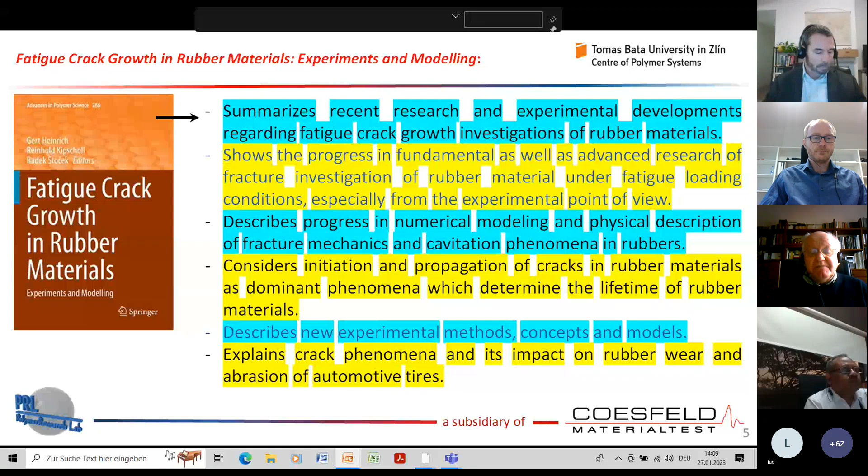It describes new experimental methods, concepts, and models—concepts meaning also how to correctly evaluate the data. In some chapters you also find explanations about crack phenomena and their impact on rubber wear and abrasion, especially of automotive tires. This is also an issue that now has great importance for many branches of industry, in the rubber industry and tire industries.

This is the content, and the green marked headlines are related to the presentations today.

As I already mentioned, Stocek will give a presentation about some revisions of fatigue crack-growth characteristics, and also some special issues concerning the determination of the parametrical functions which define the deformations within plane strain tensile rubber samples. So this is focused on discussing inaccuracies in fatigue crack-growth characteristics, and also on consequences for the development of durable rubber compounds.

Chris Robertson as the next speaker, or as here in that case it is the first speaker, he will report about his chapter that is dealing with the fatigue threshold of rubbers and its characterization using the cutting method.

In this chapter you will learn more about the definition of fatigue threshold and endurance limits, these very specific but important keywords in connection with the fatigue physics and fatigue engineering of these materials. Last but not least, you also find a very nice review about the molecular interpretation of all these parameters.

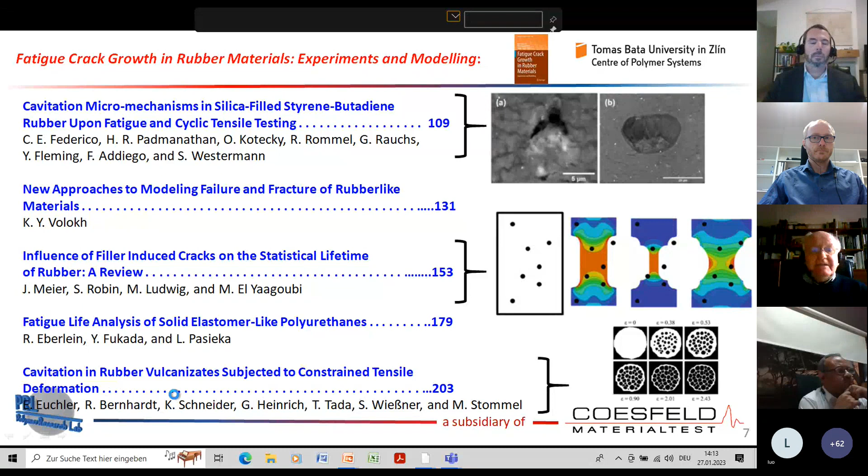Then a chapter from Dresden, cavitation in rubber vulcanizates subjected to constrained tensile deformation. Maybe this is also content of the next webinar. We will report more in detail about that.

And then we have the presentation of Dr. Ghosh from Hasetri about fatigue crack growth and the relationship and impact on phenomena like chip and cut wear. Here, especially chip and cut wear of natural rubber systems and natural rubber SBR blend systems.

This is, of course, very interesting for people that use these kinds of rubbers in connection with the production of tires. Last but not least, only to mention, it's not the topic today, but I would like to mention that here in my introduction are the other chapters that are still in this book.

That is a review on the role of phase morphology and the energy dissipation around the crack tip during the propagation of cracks in a rubber system. That is from Hannover with Dr. Klüppel and Mr. Wunder.

And then also thermoplastic elastomers. It's not only an issue of rubbers, of classical rubbers, it's also an issue for people dealing with thermoplastic elastomers. This is the contribution from Professor Major from Linz, Austria. He presents a methodology used for the characterization, the fracture and fatigue behavior of TPEs.

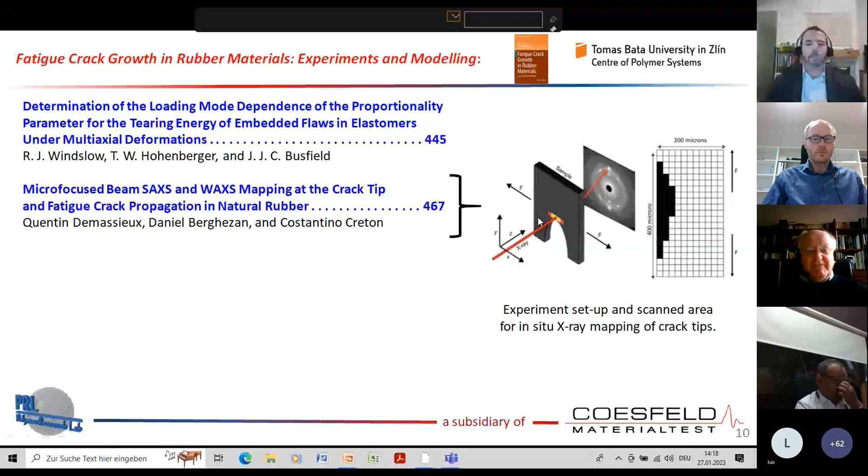So this is the content that I have briefly explained. I think we can now start with the first presentation.

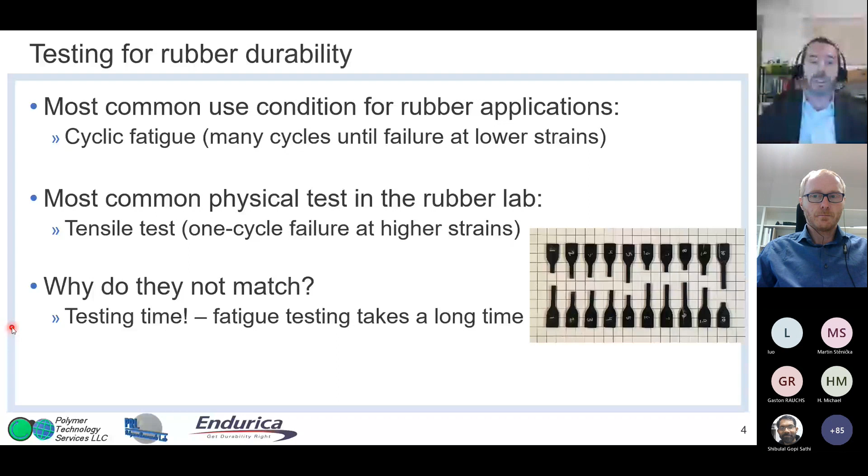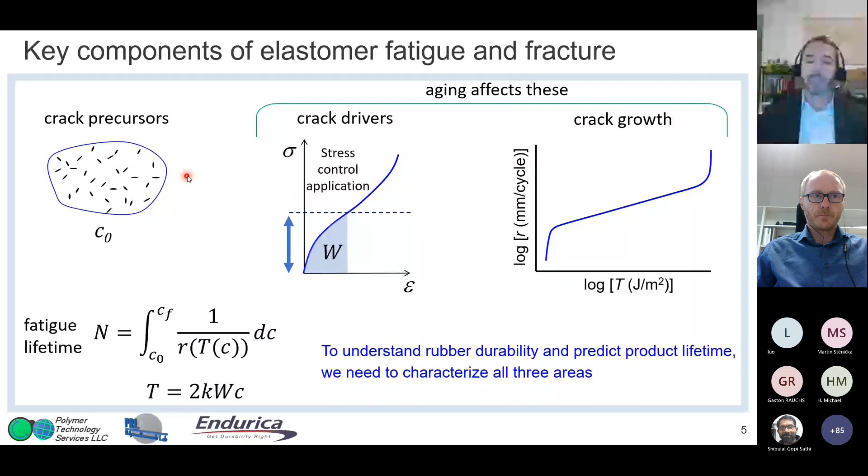So it is a physical property of elastomers, and it is affected by rubber formulation, as you'll see later, especially the type of elastomer. If you can figure out a way to make a rubber part operate below this limit, then it can have a very long fatigue lifetime, again not considering other life-limiting changes to the material.

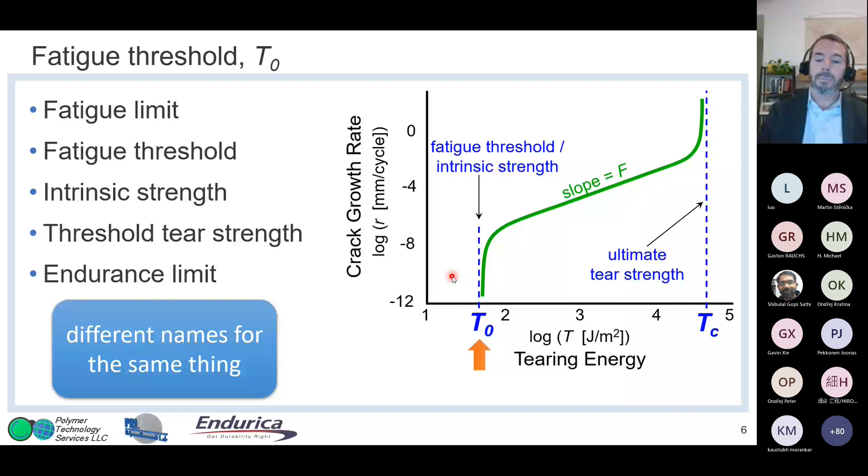And then you would watch the crack grow with a high resolution camera, and so you measure a crack growth rate, how fast that crack grows for a certain number of fatigue cycles where the crack is open and closed, and then characterize that crack growth rate at different conditions.

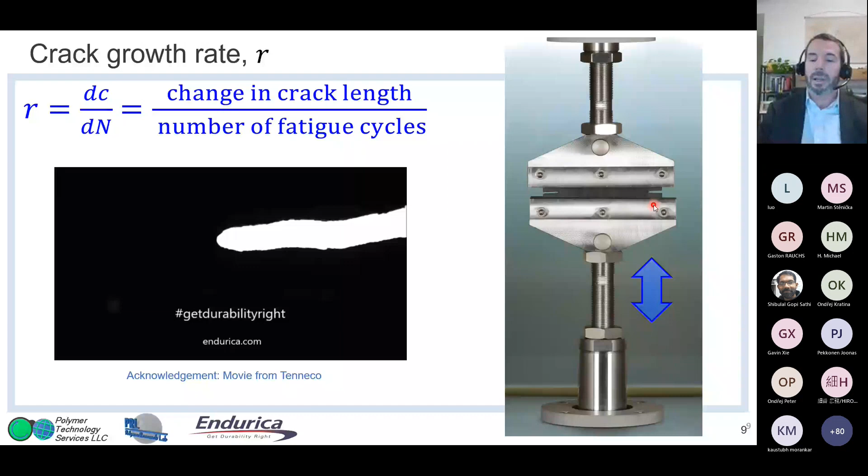And actually, Dr. Stocek, who you'll hear from later, pioneered the use of two cracks on one specimen, which allows you to get twice as much information during a measurement. And this can even be fully automated. This is a Coesfeld tear and fatigue analyzer.

This particular version is testing 9 specimens simultaneously. There's 3 groups of 3, 3 here, 3, and 3 more behind the camera, which is moving. And then each specimen has 2 cracks in it. So you can see the potential exists for really collecting a lot of information about fatigue crack growth in an automated way.

So you take that information and you would vary how much the crack is opened, small amount, larger amount, even larger amount, and that can then be converted to a tearing energy, allowing you to plot the crack growth rate versus tearing energy like I showed earlier. It typically shows this power law response with an exponent F. So this is the fatigue crack growth testing that's typically done.

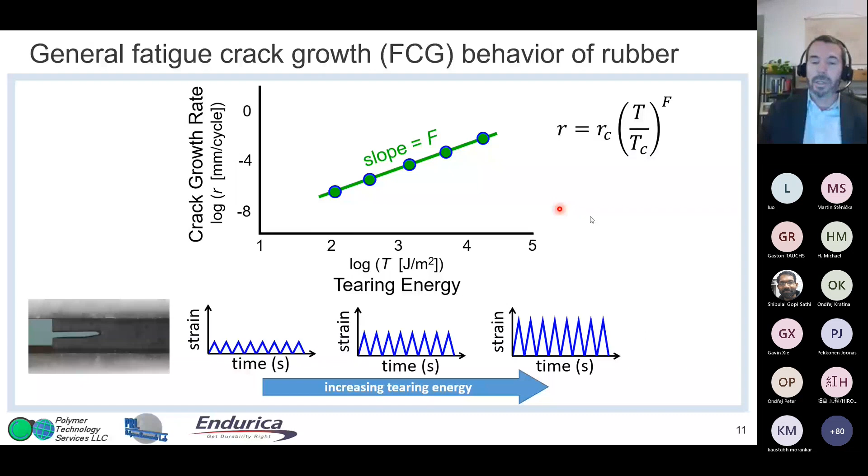In particular, butadiene rubber is better than natural rubber for small scale abrasion, wear resistance of tires. Natural rubber, on the other hand, is much better for very high severity cut and chip type damage of rubbers. But again, characterizing the crack growth curve allows us to do such a comparison of materials. So what I just talked about is this middle part of the crack growth curve here.

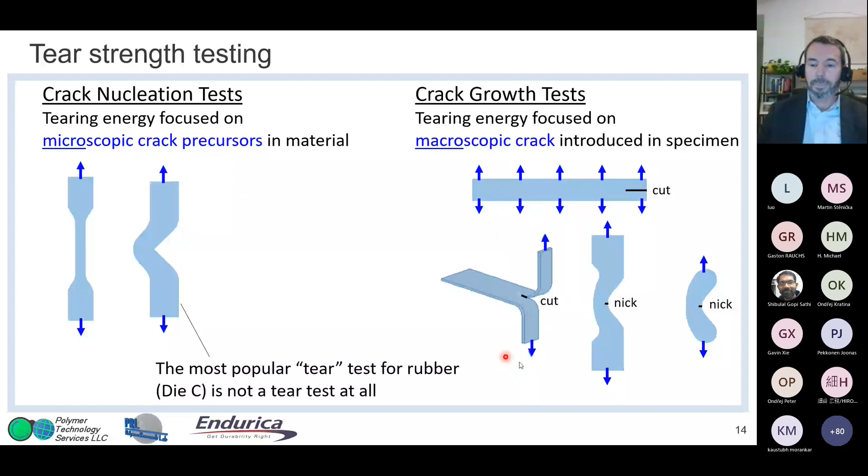On the other end of the curve is this fatigue threshold that we're going to spend some time on. So we talked about the ultimate tear strength, that's kind of an upper limit. This now is the lower limit of the crack growth curve, below which fatigue cracking will not happen.

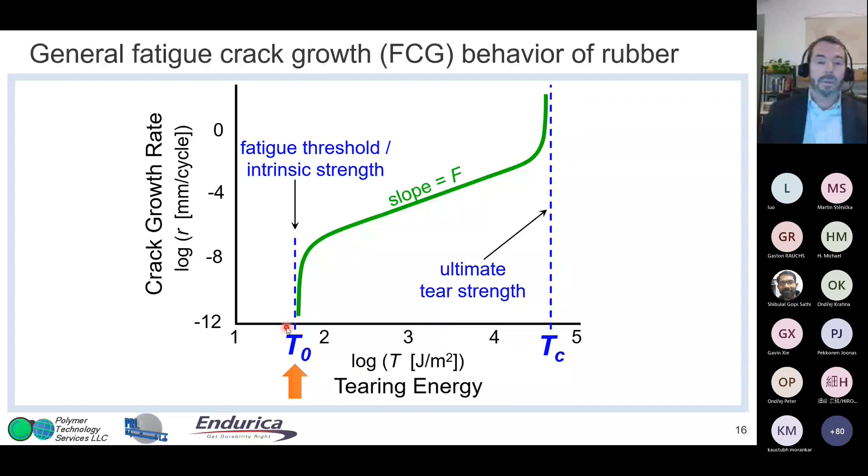So I'm going to give some examples of how to measure it. Before I do, though, the intrinsic strength that is underlying this threshold...

...is the minimum energy to grow a crack in rubber, which is connected to the energy to break the polymer chains. So if these are two cross links, and this is the portion of polymer chain that's between those two cross links, as the crack grows through the rubber, it has to break all of these sections between cross links in the plane of the crack. So if you want to know how much energy it takes, then you can add up all those chains and find out the energy to break the bonds.

And that's exactly what Lake and Thomas did, to relate it back to some molecular things that we can use to compare different elastomers, for example. But we'll get to that in more detail later.

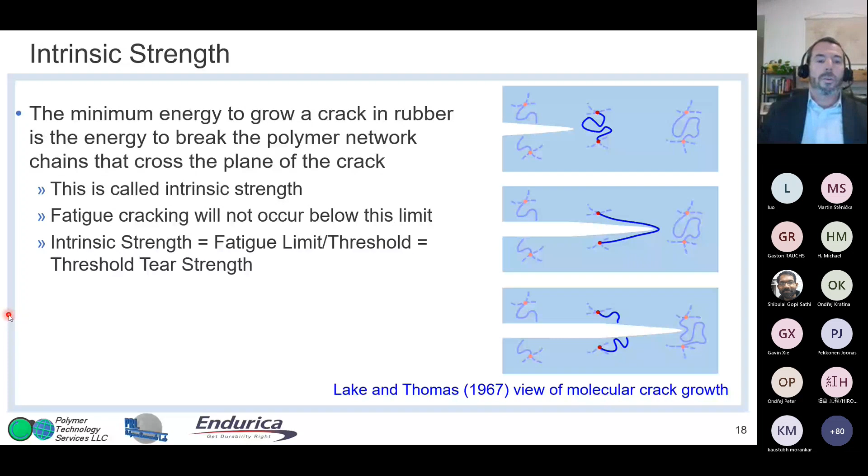Why is that so difficult to measure, the breaking of polymer chains? Well, when you load up the rubber from the far field, not all that energy actually makes it to the crack tip. A lot of that energy gets dissipated in front of the crack and never makes it to breaking the polymer chains. And so that's why the tear strength of rubber can be 10 to 10,000 times higher than this fatigue threshold for breaking all the polymer chains. The tear strength in magnitude is 10 to 10,000 times bigger than the amount of energy it takes to break the polymer chains, and that's because of dissipation.

Hysteresis and energy dissipation, some people view it as something negative in rubber compounds because of heat buildup and tire rolling resistance, for example. But if it wasn't for viscoelastic energy dissipation, rubber would be a very weak material. So hysteresis is our friend when it comes to resisting damage development inside rubber.

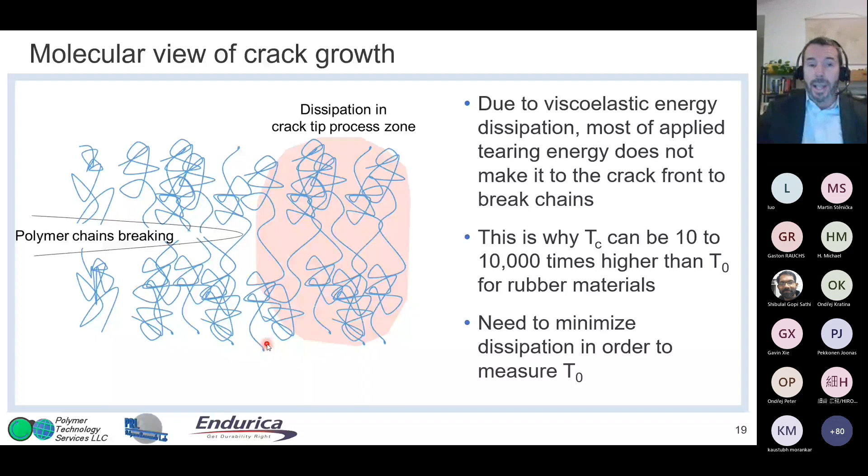Now, the problem is if you want to measure T0, you somehow have to figure out how to minimize this dissipation in front of the crack tip so you get closer to only measuring the breaking of the polymer chains. So there are three different ways of doing that. One is to measure crack growth using fatigue crack growth like I showed you, but very slow, very low tearing energy near that threshold.

The second way that I'll show is to use tear strength of swollen samples or at high temperatures. Why do we do that? Well, swelling and high temperature are both a way to reduce hysteresis, dissipation. So some way to take this big crack tip dissipation zone and shrink it down so that I'm mainly measuring the breaking of polymer chains.

And then the cutting method, which does that minimization and focuses the strain energy density at the crack tip using a blade.

So I'll go through all three of these.

The first one is trying to get somewhere close to this downturn in the fatigue crack growth curve so that you can determine T0. The problem is when you do these crack growth measurements, where this turns down is somewhere around 10 to the minus eighth millimeters per cycle. And so what does that mean? Well, if you wanted to measure half a millimeter, even at 10 hertz, it would take 2 months. So you can start to see the problem with trying to use this method to define where this curve starts to turn downward. And obviously 10 to the minus 10th is even higher.

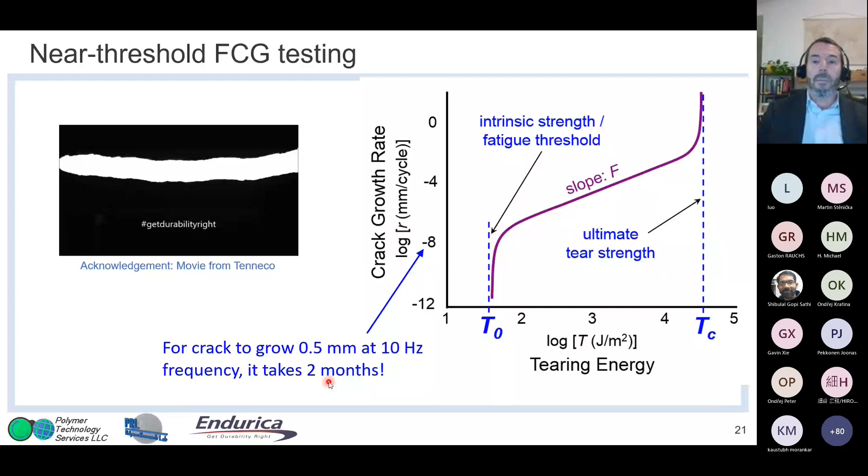But you can see, crack growth testing, you can get most of the information for the curve in a few days. But if you want to get anywhere close to the fatigue threshold in order to quantify it, then it starts taking really extremely high lab times.

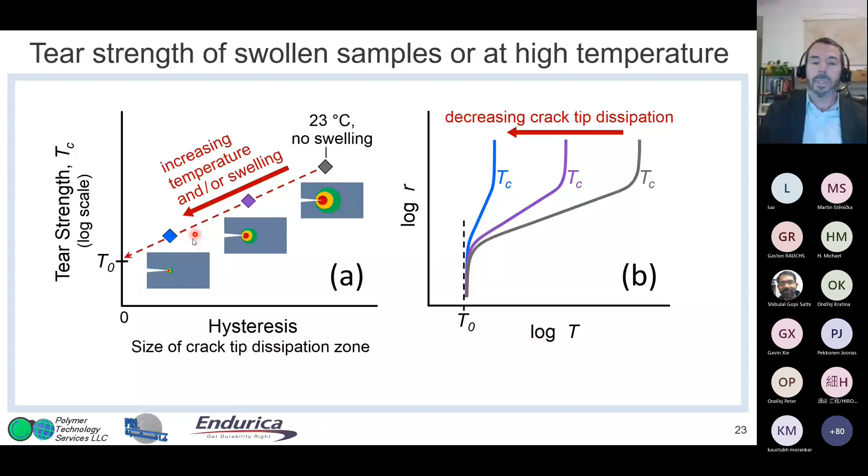If you're using solvents and doing swelling measurements, the solvent can evaporate during testing. And then if you do swelling, you have to correct the T0 because of the swelling. Remember, the crack has to break all the polymer chains, so if you put solvent in the system, you're basically diluting the polymer chain. So you have to account for that. The swollen value ends up being smaller than the dry value, so you have to use the swelling ratio to relate between the two. And that just assumes the only effect of solvent is pumping up the volume and diluting the system. It could certainly have other effects on the tearing of those polymer chains that really isn't accounted for in this kind of analysis.

And then finally, the method I'd like to focus on more today is this Lake and Yeoh cutting method, using now a commercial instrument, the intrinsic strength analyzer from Coesfeld. This is a commercial instrument, readily available. It was developed through a partnership between Coesfeld and Endurica, where I spent 4 years.

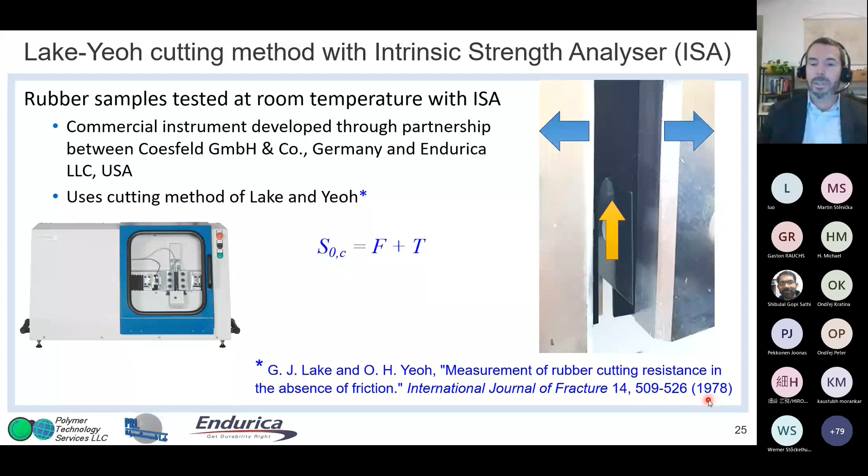Basically, if you look at this, this is a planar tension specimen, but it's turned sideways. It's turned vertical, and there's a cut in the specimen into which there's a blade that's pushed. You can see it much better here. So here's a blade. So we still open the crack like you would normally for a tear strength measurement or a fatigue crack growth measurement.

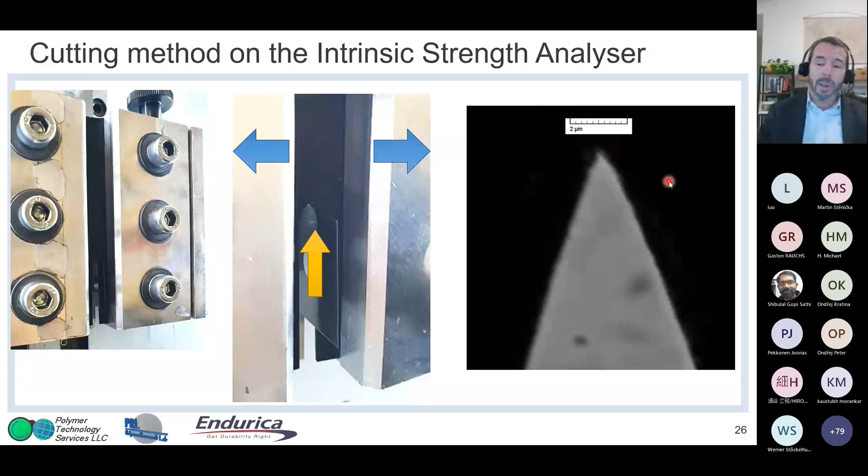Open the crack at some given tearing energy. And then while the crack's open, push a very sharp blade - you can see this is 2-micron, a very sharp blade - push it into the crack while it's open. And it's not a single measurement. You have to make measurements at several different points.

The whole goal of the blade is to localize the strain energy density. If you just open the crack from the far field, as I mentioned earlier, a lot of that strain energy density doesn't make it to the crack tip because of dissipation. But when you push a blade into the tip, it localizes the strain energy density to minimize dissipation.

So as I mentioned, it's a series of measurements. You open up the crack at different levels, and then you very slowly push the blade in. We also make measurements at other faster rates first, and then slow down to this final very slow cutting rate, for which the data is shown here.

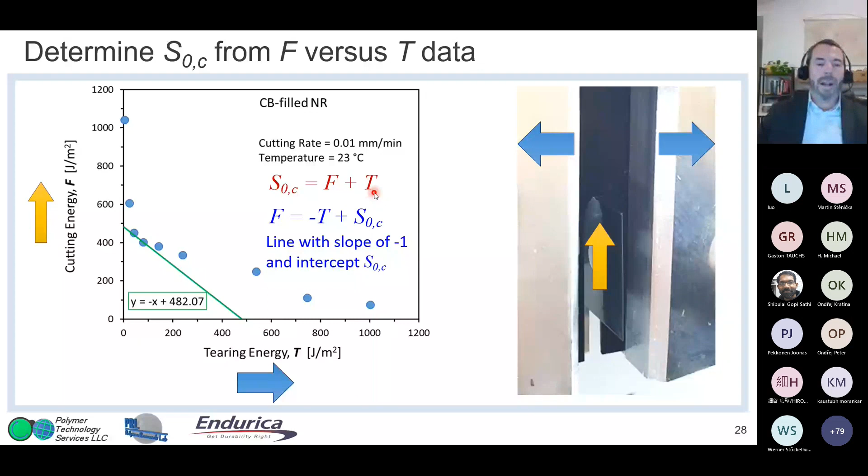Remember, this is at the other end of the crack growth curve. And you can now already see that there's going to be a flip of behavior. Now, butadiene rubber is showing much better crack growth resistance.

So you can see that we don't have T0 yet, we have this so-called S0. What Lake and Yeoh did is they plotted the quick cutting method value that I just showed you and compared it to T0, measured from that near threshold, very long fatigue testing I showed you an example of from Dr. Stocek earlier. What they saw was that these were related to each other, and the difference was this constant, which was related to the blade, how sharp the blade is, etc. So one of the key things needed in this method is a control material for which you know T0, and then you can measure S0 using the same conditions in your other experiments.

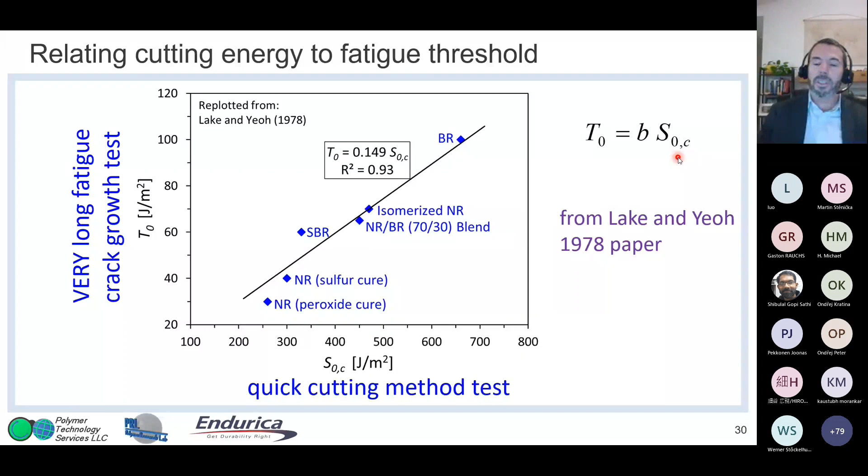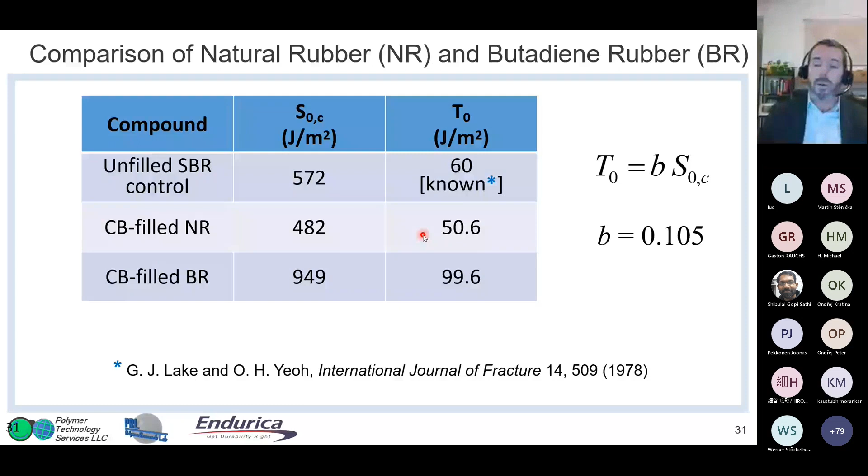So that was done here. I showed you the data for carbon black filled natural rubber and butadiene rubber, 482 and 949. Our control material was an unfilled SBR, it had a value of 572 and a known T0 of 60. Based on that known value of 60, we can determine B, which can then be applied to the other two materials. What you see is that the fatigue threshold for butadiene rubber is about double the fatigue threshold for natural rubber, but both are much smaller than the tear strengths for those materials.

So you can see that here. Here are the tear strengths, 50 and 99.6 — sorry, the intrinsic strengths, the fatigue thresholds, are 50.6 and 99.6. And then the tear strengths I showed you earlier are much higher, 18,500 and 3,000. And what we learned was, if you assume some very fast crack growth rate for TC and some very slow crack growth rate for T0 — 10 to the minus 2 for TC and 10 to the minus 8 for T0 — you could actually plot those data points.

So here's natural rubber, 18,000. Here's butadiene rubber, 3,000. You can plot those two data points on here, and then do the same at the low end. What you see is butadiene rubber is here and natural rubber is here. If you just draw a straight line between them, it almost captures the actual fatigue crack growth data that were acquired from testing. This was a sign that if you know the two ends — the tear strength at the upper limit and the fatigue threshold at the lower limit — that knowledge can give you an approximation for what's happening in between, and you can even reproduce the crossover simply by drawing a line between those two points.

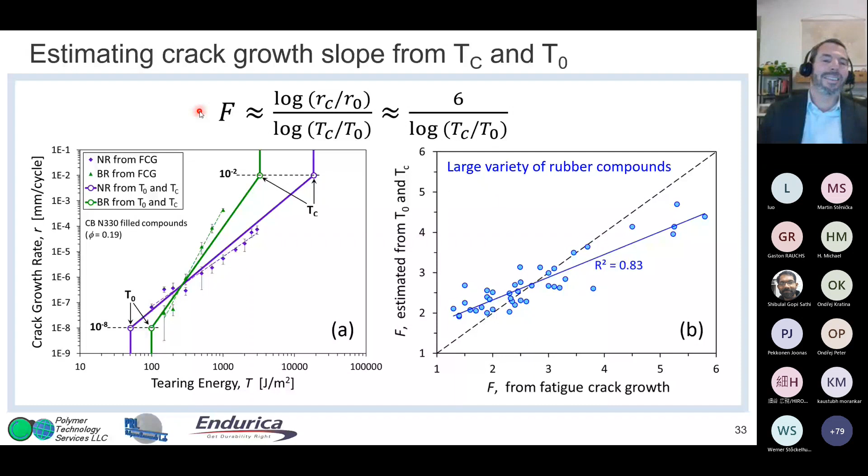So that brings us into this Lake-Thomas molecular theory and some rubber formulation effects — they kind of dovetail nicely together. Lake and Thomas, again, took this picture that in order for a crack to move through rubber, the minimum energy required is the energy required to break all the polymer chains. So this chain is already broken, and the first thing that happens is the crack stretches the chain between the crosslinks. One of the assumptions in their approach is that these crosslink points don't move — maybe that's not realistic, but again, that's one of their assumptions. So first thing is the chain has to become stretched.

That's where this molecular weight between crosslinks comes into play. You have to energize all the bonds in the polymer chain, stretch them till one can break, and then the polymer chain breaks. And what you see is there's some really nice things here that a polymer chemist and a rubber scientist can use to figure out what's happening in a rubber compound.

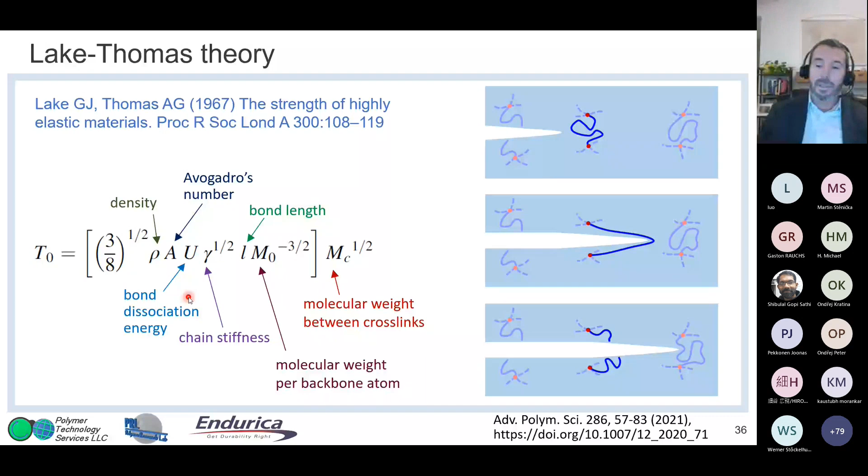And what you can see is that if you hold everything constant and you change only the elastomer type, the main area where things are going to change is this M0, molecular weight per backbone atom. Smaller is better, notice the minus sign here. And chain stiffness has a positive impact on fatigue threshold.

So we made some measurements on carbon black filled elastomers, different elastomer type: natural rubber, isoprene rubber. Obviously, chemically, these first two are very similar to each other, butadiene rubber and an emulsion type SBR. And the M sub 0 is the molecular weight per backbone atom. It turns out to be 17 for polyisoprene, whether natural or synthetic. Butadiene rubber is much smaller at 13.5, and then SBR is 19.6 because of that heavy styrene group.

What you see is if you compare natural rubber and butadiene rubber, the M sub 0 exactly explains what's going on. You get a much smaller M sub 0 for butadiene rubber, and you get a much higher fatigue threshold, 80 instead of 20. SBR is not just an M sub 0 effect because SBR also has higher chain stiffness. So that one needs chain stiffness to come into the discussion to understand where it fits. But the relative ranking is lowest is natural rubber, highest is butadiene rubber, and in between is SBR.

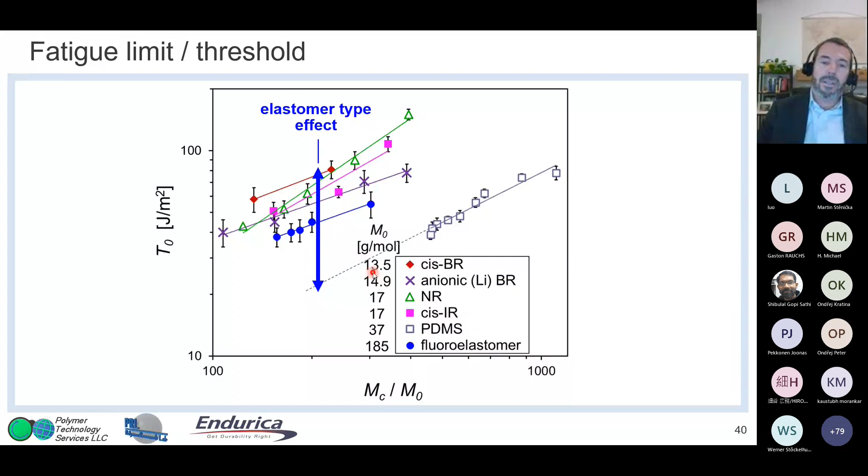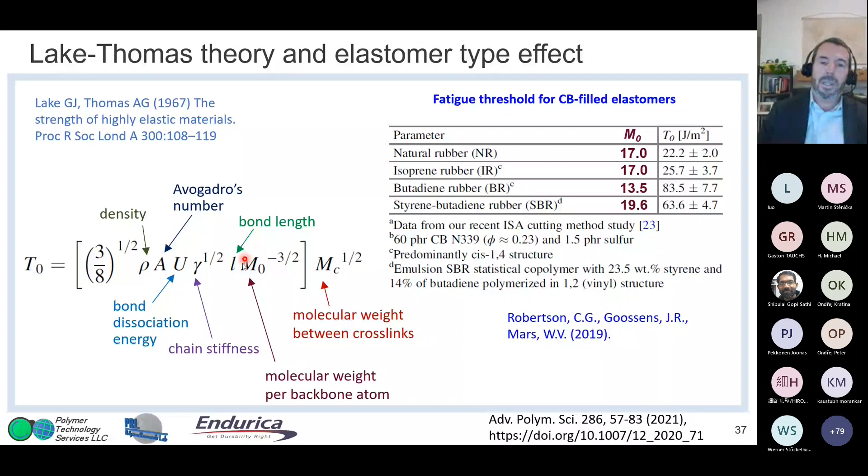This dependence on M0 means smaller is better. So that means a lighter backbone means a skinnier polymer chain. And so it basically means more polymer chains have to be broken per area, and therefore that leads to a higher fatigue threshold. So you see something like polydimethylsiloxane and fluoroelastomers have really high M0s, and they have very low fatigue thresholds. So the elastomer type effect can be very nicely rationalized based on this molecular theory.

When we dug into cross-link density effects to see if this prediction held, we generally did not agree with it. But we didn't do a lot of testing—just a couple of systems: carbon black filled SBR, and a passenger tire tread blend of SBR and BR rubber with silica and silane. When we plotted fatigue threshold from the cutting method versus sulfur loading in the formulation, adjusting accelerator to keep crosslink type similar, we didn't see the expected downward sloping trend. So there's still work to be done in this area.

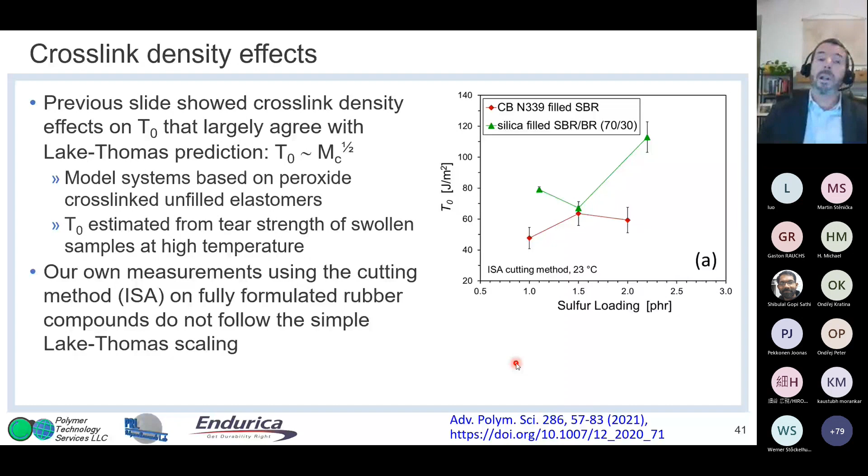Oil is relatively simple to rationalize because it's related to that swelling effect. If you add oil to the rubber formulation, it pumps up the volume and dilutes the polymer chain. Based on the swelling discussion earlier, you can determine a swelling ratio from the amount of oil added and its density relative to the polymer. It's typical to buy oil extended elastomers like SBR with 37.5 parts of oil. I was curious what this analysis would show, and it turns out oil extension reduces the fatigue threshold by almost 20%. So if you want a durable, long-lasting rubber compound, removing oils and other low molecular weight additives is generally a good strategy.

Filler effects: before we had access to the cutting method, the only literature available was from swollen tear strength testing—an approximation method where swelling the sample removes some hysteresis, getting closer to the actual fatigue threshold. Previous work published by Bhowmick and co-authors showed a striking effect of filler volume fraction—carbon black and even clay—on fatigue threshold in both natural rubber and SBR compounds. But again, this was an approximation method with the limitations I mentioned.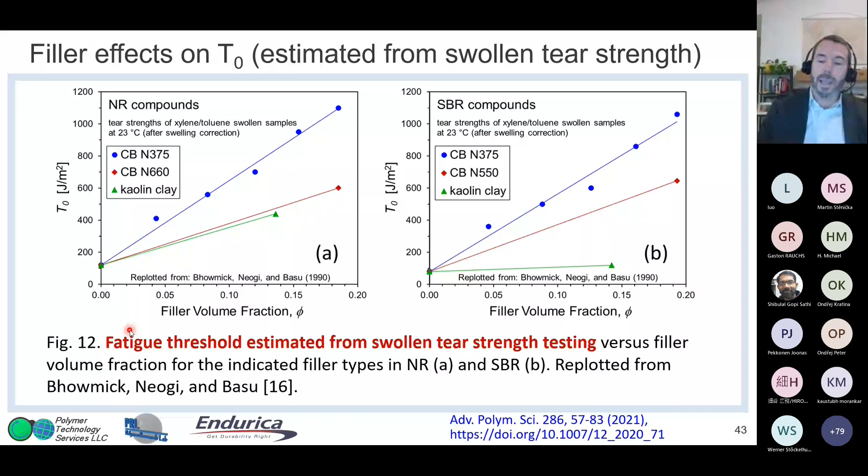We did this ourselves with EPDM at three carbon black loadings of N550, SBR at three loadings of N339, and the tread silica formulation I discussed. If anything, we saw the opposite effect, or at best basically flat. So we did not find a significant effect of filler volume fraction on fatigue threshold, at least in our rather limited measurements so far.

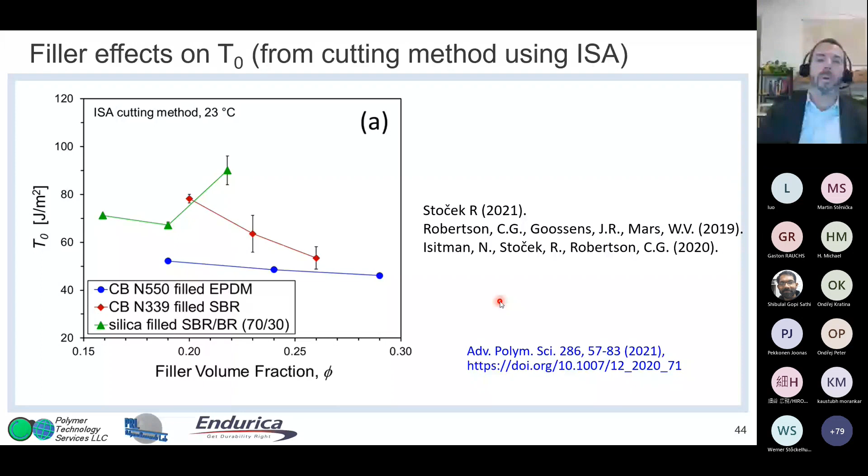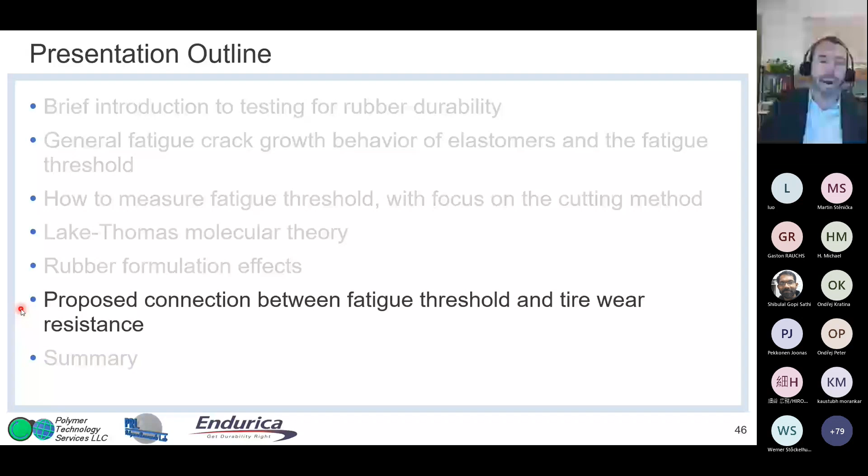The last thing I promised to get to, with just a couple minutes left, is this proposed connection between fatigue threshold and tire wear—not cut and chip wear resistance, but small scale, low severity abrasion. There are micro asperities on the road that give a range of tearing energies to the tire tread, depending on asperity size and the normal load and slip conditions on each one. So it's a heterogeneous situation with respect to spatial considerations and load intensity. Fatigue in rubber starts with crack precursors, which grow and eventually intersect, leading to tire wear. This is just the mechanics piece of tire wear—it doesn't include other pieces like thermal oxidative breakdown and other contributions. But at least some of wear we can understand from this micromechanics.

Remember that the fatigue threshold for butadiene rubber is about double the fatigue threshold for natural rubber. One of the mysteries I've always scratched my head at is why natural rubber should have worse wear resistance than butadiene rubber. I think this picture can help understand that.

If you have a distribution of tearing energies happening from that very heterogeneous situation at the surface, where road asperities are sliding past the surface of the tire, anything below the fatigue threshold—here for natural rubber and here for butadiene rubber—will not contribute to damage. So if you have a higher fatigue threshold, some of those events happening at the surface won't cause crack growth. Based on this, the higher fatigue threshold for butadiene rubber may be one reason why it has better wear resistance than natural rubber.

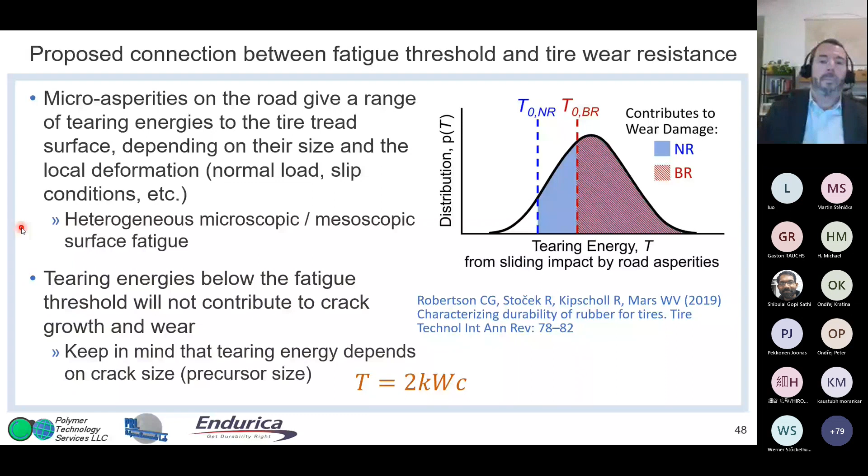But what about the TG effect? There's this tire industry heuristic: lower TG is better for wear resistance. Based on dissipation in front of the crack tip, this never made sense to me from a crack growth perspective. If anything, higher TG should be better.

But we have to remember there are very few polymers actually used in tire treads—essentially only BR, SBR, and natural rubber. So my perspective is it's not lower TG that's better for wear resistance, but rather more BR in the formulation, because of this ranking of fatigue threshold: BR is higher than SBR, which is higher than natural rubber. And BR is about twice the fatigue threshold of natural rubber.

I showed you the Lake-Yeoh cutting method that's now commercially implemented on the intrinsic strength analyzer. It can characterize a fatigue threshold in about 1 to 2 hours. Compare that to near-threshold fatigue crack growth, which takes months—now we have a really quick method to assess this key parameter of rubber.

If you take that parameter and combine it with tear strength, you can get a first-pass approximation of the power law slope for fatigue cracking. Lake-Thomas gave us a nice molecular view of fatigue crack growth at the fatigue threshold limit, and it generally predicts elastomer type effects. However, cross-linking effects and filler effects need to be studied further, with no real consensus yet. All of the literature prior to the intrinsic strength analyzer was mainly estimated from tear strength of swollen samples, and that may be one reason why we have some disagreement among the data results.

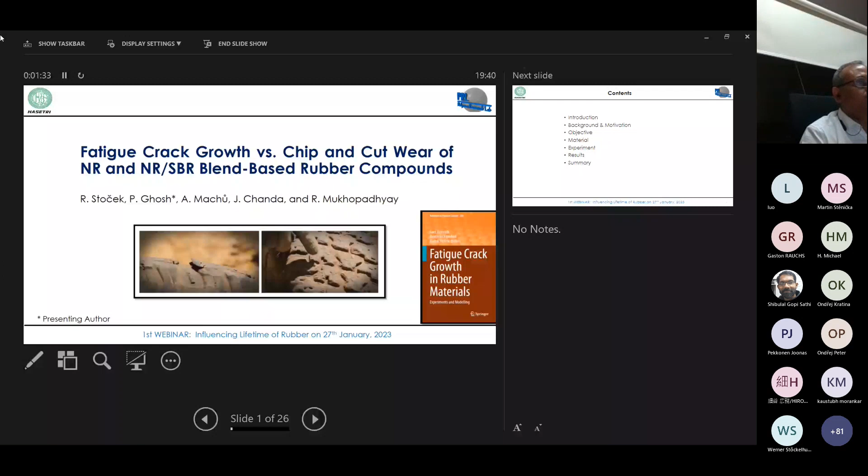So the presentation—can you switch? Sorry, can you switch to presentation mode? Can you see the next slide now? Is it visible, the content slide? Yes, we see that, but I suggest switching into presentation mode so the slides are larger on the screen. Okay, it's showing here, I'm not sure. If it doesn't work, it's okay. Okay, yeah, we see now the actual slide as well as this next one. Okay, okay, I'll just do one thing.

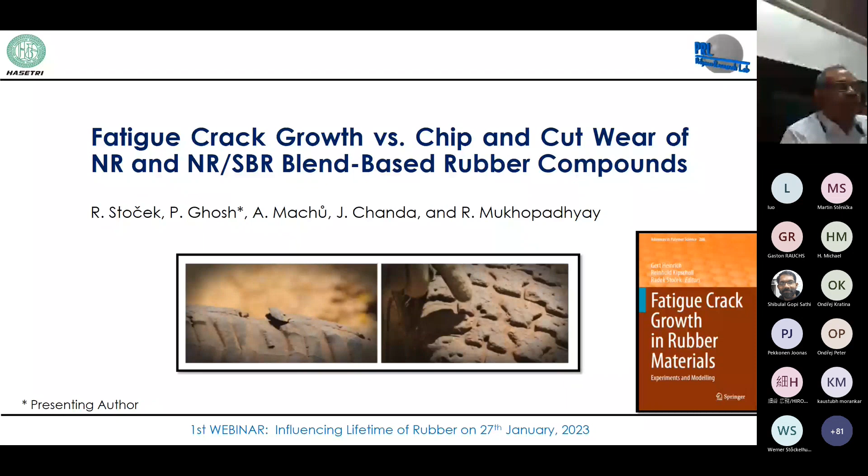So the presentation flow will be like this. I will start with introduction about the tyre and its performance requirements, and then we'll talk about the background and motivation. Then we'll discuss the objective, followed by material and experimental methodologies used, and we'll discuss the results, and finally we'll summarize. So if you see a tyre as a vehicle component, it could be anything.

It could be a two-wheeler, a four-wheeler, or a commercial vehicle. So there are 4 or 5 different functionalities which it has to perform. First of all, it should carry the load. Then it should assist you in handling, like acceleration or braking. It should provide ride comfort, specifically with respect to noise, vibration, and harshness. And it has a good contribution with respect to fuel efficiency or fuel economy because of the rolling resistance.

And the last two parts are related to safety and durability, which are interrelated. Safety with respect to the braking distance on wet roads, or durability - like if a tire hits a pothole or some nail, the tire should not fail, or it should show some resistance so that the passenger will not be in trouble. Today's presentation topics are also related to safety or durability with respect to fatigue crack growth or cut and chip.

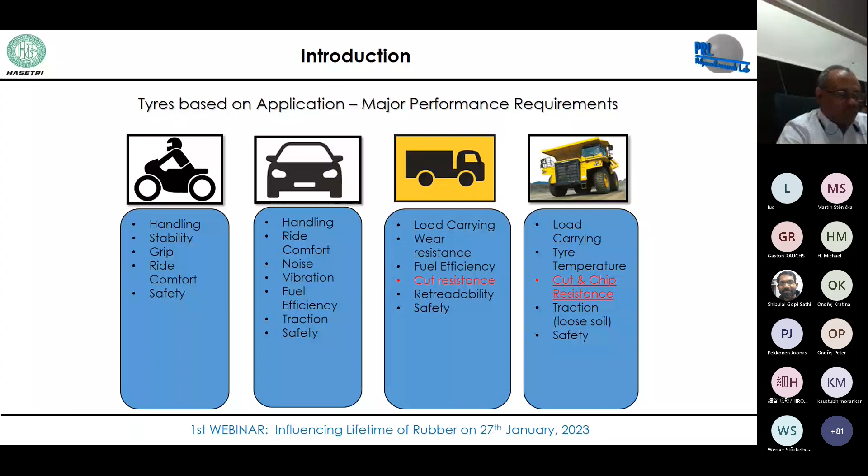Before I go to that, I would like to give some historical perspective of tire failure, and I will not take much of your time, just to explain the history. However, all of you, maybe those in this generation of tire technologists or the previous generation, know the Ford Firestone fiasco, and it has a relation with fatigue crack growth. So just to link with that, I'm trying to give a few facts.

Two personal friends, Harvey Firestone and Henry Ford, started their corporate relationship in 1906. Henry Ford chose to outfit Firestone tires to his new Model T, which was one of the most famous cars in those days. In 1990, the Ford Explorer began to lead one of the greatest automotive revolutions in history.

Globally, it remains a popular model today. However, the journey of the Explorer's epic popularity was not so smooth - it has a troubled history. What was that? I will try to explain in a very brief manner.

Another important fact: between 1990 and 2000, the NHTSA received a large number of complaints regarding tire failures on Ford Explorers equipped with Firestone ATX, ATX2, and Wilderness AT model tires. This resulted in many road accidents, and some people died. As a result, Firestone and Ford Motor Company had to recall and replace about 23 million tires, which cut the market value of Bridgestone and Firestone in half. This is the fact about the Ford-Firestone issue, which was reported in early 2000.

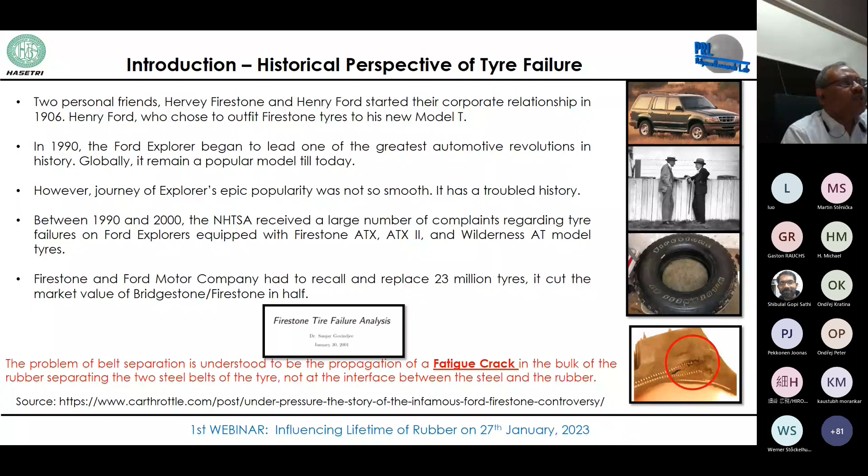This cut-chip generally appears in the later stage of the tire's life. Let's say if one tire is running about 1 lakh kilometers, it may be happening at the end of its life, maybe more than 60% or 70% of its life. These are a few of the pictures.

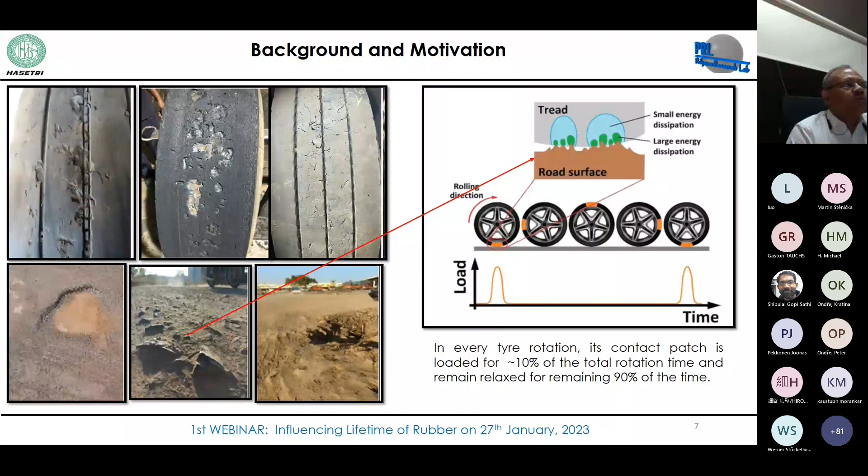So what is the objective of this particular work? To develop a laboratory test method that can simulate the realistic live operating condition, that can predict our performance with respect to crack tip behavior, which is very important. At the same time, also the quantitative determination of the complete Paris-Erdogan curve characterizing the FCG behavior, from endurance limit up to ultimate strength.

Dr. Robertson had already given a complete detailed account of the threshold, what is the threshold or endurance limit or intrinsic strength. He made my task much easier since the audience has already got detailed information about it. But for the sake of keeping connectivity with my work, I will try to explain things in a simpler way, a very quick introduction, so that it will not be a repetition of what Dr. Robertson has just spoken a few minutes before.

So it starts with the endurance limit T0, which is also called the intrinsic strength, then the stable crack growth zone, the steady state zone, and ultimate strength or critical tearing energy. One important point, which Dr. Robertson has also mentioned, is that the endurance limit or intrinsic strength was not talked about much in the literature. In 1978 Lake and Yeoh, and later Professor Bhowmick, gave some of these things, but due to the unavailability of proper instrumentation, it was not explored so far.

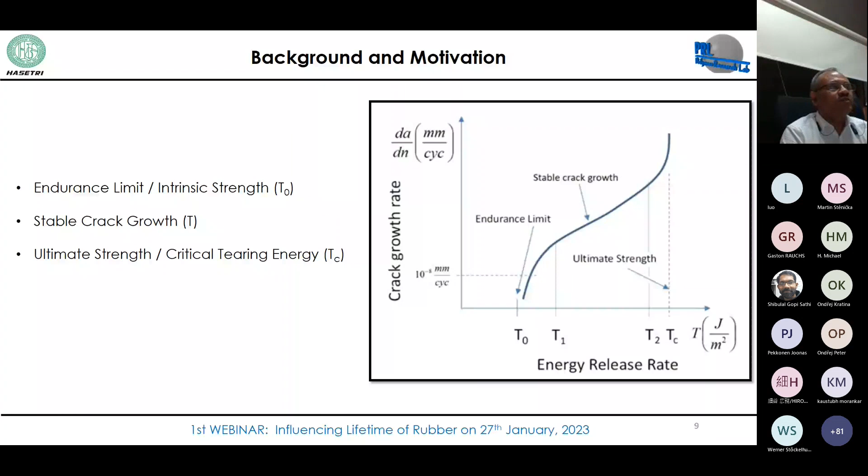So it will be unfair if we do not talk at least on some of the basic points about this, which we'll be using for our work as well to explain things. So I'll just quickly go through the next few slides. Don't get upset about the long, busy slides.

Basically, the strength of rubber depends on its chemical structure as well as on the viscoelastic behavior occurring in the crack tip near field. Basically, the strength is derived from the viscoelasticity. So far, the classical rubber technology education says that natural rubber has crack initiation that is early, but crack propagation is delayed, and vice versa for synthetic rubber.

So that was a statement, altogether it was a statement. But after measuring the T0 values, and a lot of work has been done, this can be quantitatively explained for different types of rubbers, why this is so.

If you see the complete crack growth curve starting from the threshold level to the ultimate strength or critical tearing energy, this is very clear. That's the reason synthetic rubbers derive their strength from this viscoelastic energy dissipation. Therefore, the total energy required to propagate a crack in rubber is usually significantly greater than the energy associated with the intrinsic strength of the molecular structure.

There is a minimum energy requirement for propagating this crack, or cutting these polymer chains. This minimum energy depends primarily on the details of the polymer network, such as average molecular weight between crosslinks, and on the weakest bond in the main polymer chain. This is also explained in detail in the previous presentation, and it is therefore often called the intrinsic strength, since it reflects the polymer chemistry and the network.

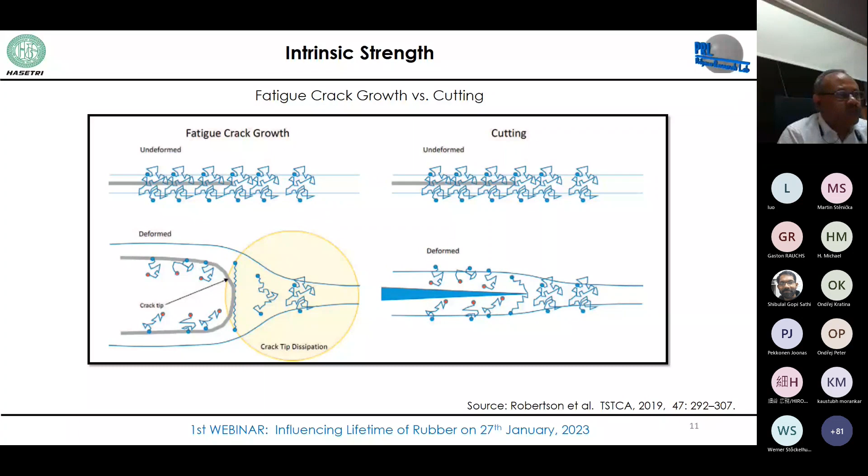However, in the case of cutting, if the crack dissipation at the front of the crack is higher, then it will be difficult to measure the threshold strength. Therefore one needs to be very cautious about the testing procedure, which was explained in their paper very nicely, and is being used in present work as well.

So intrinsic strength marks the lower limit of the fatigue crack growth rate curve, and below this, the crack will take infinite time to propagate further. So this can be seen as the endurance limit, and this is very important while you design a product like a tire or any rubber product. If you know this threshold limit and your operating condition is below this, then you will be very safe. The next part is the critical tearing energy, which is the other extreme of the fatigue crack growth curve.

Where it fails completely, catastrophic tearing occurs. And in between, you have a stable crack growth zone, on which there are now a lot of recent publications. Therefore T0 and TC define the window within which the crack grows due to the application of cyclic deformation.

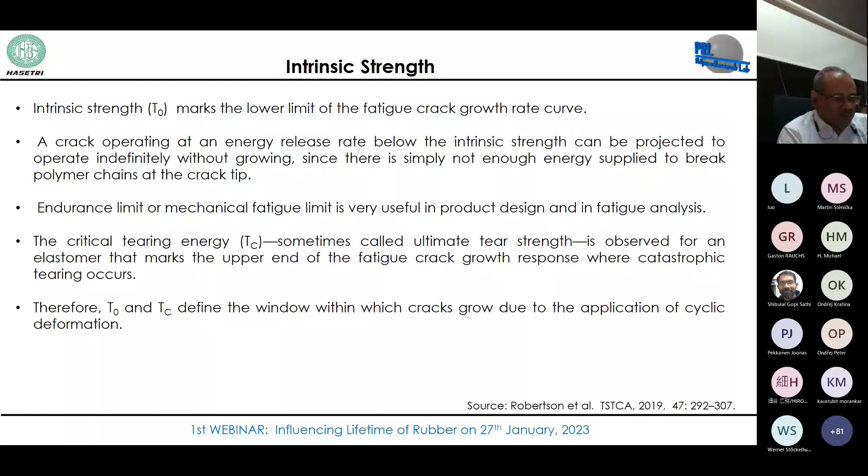Coming to the material, two different rubber compounds were used. One is 100 parts natural rubber compound. The other is 40 parts natural rubber and 60 parts styrene butadiene rubber. The fillers are also different. It was also shown by Dr. Robertson that filler does not have a very significant role with respect to T0, the threshold limit.

Different experiments were carried out, all made by Coesfeld. The first was the intrinsic strength analyzer, using a pure shear specimen of 10 millimeter by 100 millimeter by 1.5 millimeter thickness, pre-cracked at one edge. Strain percentage was 0 to 50%, giving different tearing energy levels, and cutting speed was kept at different values like 10, 0.1 and 0.01 millimeter per minute.

For the tear fatigue analyzer, for the stable crack growth zone, a mini pure shear or mini plane strain sample specimen was used with given dimensions, and temperature was kept about 70 degrees centigrade. The waveform was a Gaussian pulse with pulse width of 100 milliseconds and loading frequency of 5 hertz, taken from the previous slide, where the loading pattern is more of a pulse nature compared to sinusoidal, and R ratio was kept at 0.

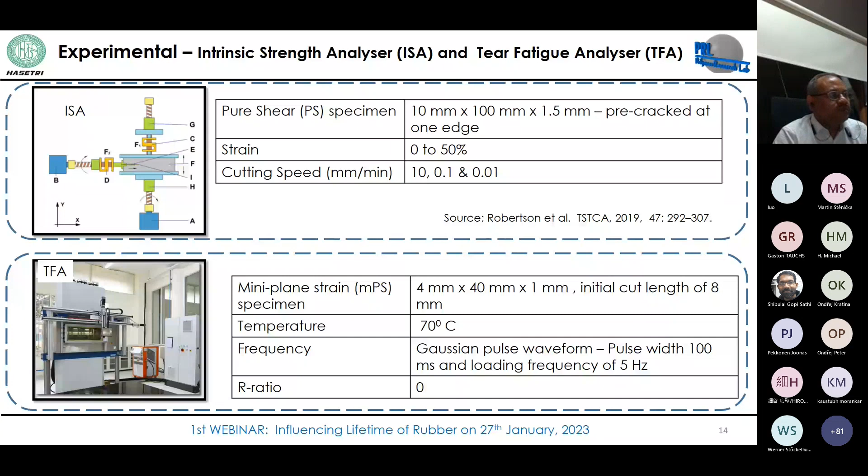The next experiment was done with the chip and cut tester from the ICCA instrument, again made by Coesfeld. This is the type of rubber specimen used, having an outer diameter of 55 millimeter and 26 millimeter inner diameter, with rotation speed kept about 200 RPM. Different normal forces were measured, starting from 70 to 170, impacting frequency was 5 hertz and impact time was 200 milliseconds. So the output will be the shear forces under that impact normal force which are responsible for creating the cuts or chips, and those will be measured.

Coming to the results for intrinsic strength, A is for natural rubber compound and B is for the natural rubber SBR blend compound, plotted as cutting force versus time. At low tearing energy level, in the case of NR-SBR there is a sharp peak initially, then it becomes smooth. Another observation is a lot of fluctuation in the case of natural rubber based compound, which we can call the stick slip mechanism or stick slip effect, due to strain induced crystallization in natural rubber, which is not that prominent in the NR-SBR blend.

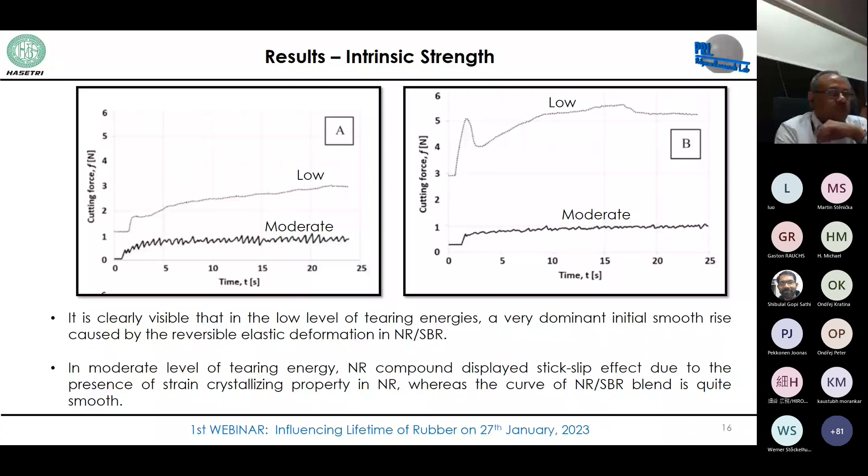After that, cutting energy versus tearing energy is plotted, and the detailed explanation has already been given in previous work and can also be found in the literature, so I won't discuss how these are measured. This is the curve for our compounds, natural rubber and natural rubber SBR. Intrinsic strength for the natural rubber based compound was 49 joules per meter square, whereas for NR-SBR it was about 61. So 60 parts SBR addition has helped achieve higher intrinsic strength, increasing the threshold limit. It was also shown in previous work that natural rubber is about 40, and for BR it will be much higher, almost double.

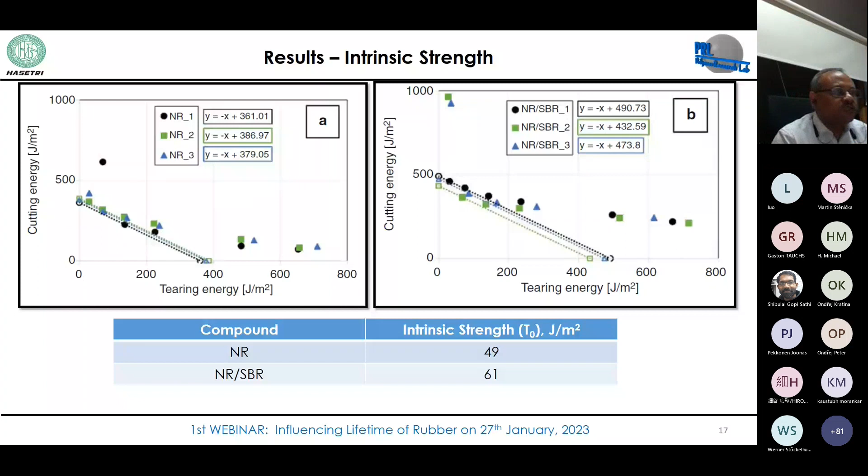And SBR is in between. These results are also in line with that observation as well. So this is the stable crack growth zone, crack growth graph for these two compounds, NR and SBR compounds.

Throughout the tearing energy zone, the NR has a lower crack growth rate compared to the NR SBR blend, which is also explainable from the previous work, as well as from the theoretical point of view, that after a certain tearing energy level, NR is having a better crack growth resistance due to the strain-induced crystallization effect.

This table also gives the material parameter from the power law model as well. Coming to the critical tearing energy, this is also measured in the ISA measurement, and you can see that although NR compound was having a lower threshold limit, when we talk about the critical tearing energy, which is quite high compared to the NR SBR compound.

16,688 versus 14,095. So critical tearing ultimate strength of NR is higher compared to the NR SBR. Based on all these informations, the complete graph was constructed.

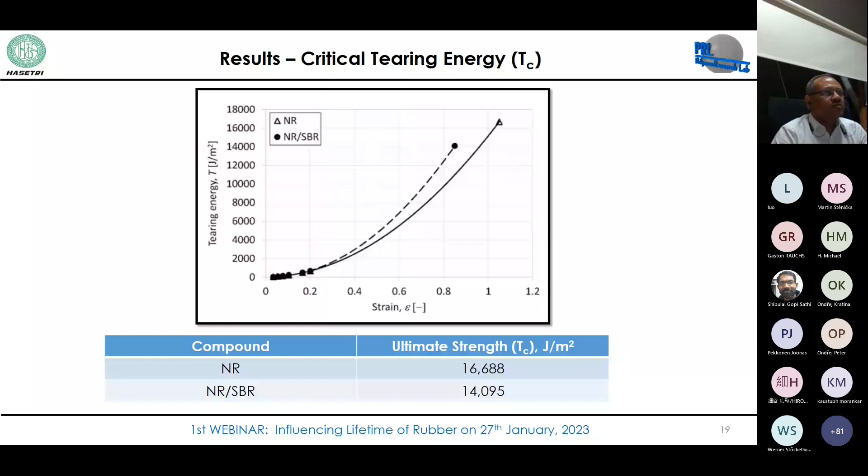You can see the red dots that threshold limit for NR compound is lower compared to the SBR, NR SBR compound. However, at the higher tearing energy zone, it is again showing the higher critical tearing energy. And of course, the stable crack growth zone or steady state crack growth zone, NR compound is showing the higher value. So one should be very careful while interpreting this data and relating with the practical application.

So we must understand where the practical application lies actually, the tearing energy level. That is very important. And we'll also explain these things when we're discussing about the cut and chip behavior.

So the ICCA results or cut and chip results, this is also done by the previous work. The majority of the methodologies were explained there, and the CC damage parameter introduced by Dr. Heinrich. And what is this? This is the parameter called P.

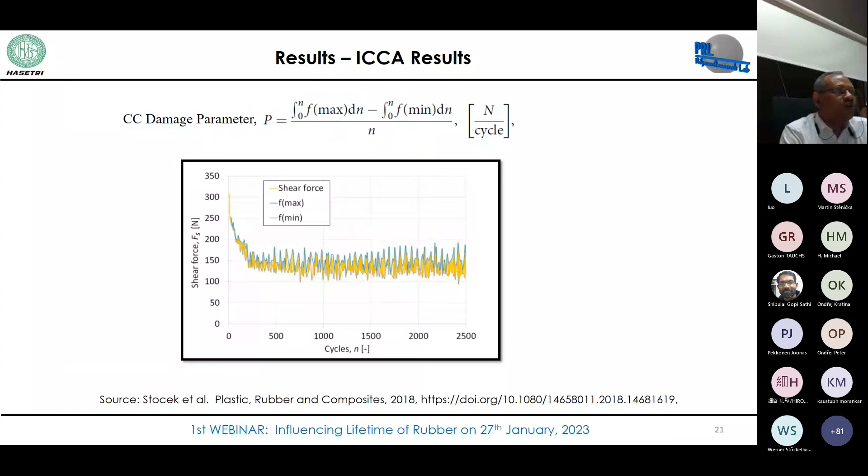So the lower the P value, better it is. And it is an integration of the force at the maximum force to the minimum force divided by the number of cycles. And you can calculate these values at different cycles level, and which is plotted for these two compounds in the next slides. And you can see the damage parameter.

One interesting observation is that for the natural rubber based compound, the left side curve, till maybe the initial energy level, initial force level, natural rubber was showing higher damage parameter, damage values compared to the NR SBR compound. However, it got reversed at higher strain.

Strain gets reversed at higher force level, which is explained in the next slides as well. So you can see very clearly that the NR curve is a smoothly linear increase. However, NR SBR is passing through a small minima, and then it is again crossing the NR curve.

So you can see that for NR SBR compound, the damage is low, maybe up to 130 Newton, the normal force. And after that, it is showing higher values, specifically at 150 Newton. So therefore, one should be very careful while selecting the compounds with respect to the application part.

And this is also another challenge, how to quantify the tearing energy level or the severity level from a very smooth road to a very high, very rough road. So which is practically impossible to do that.

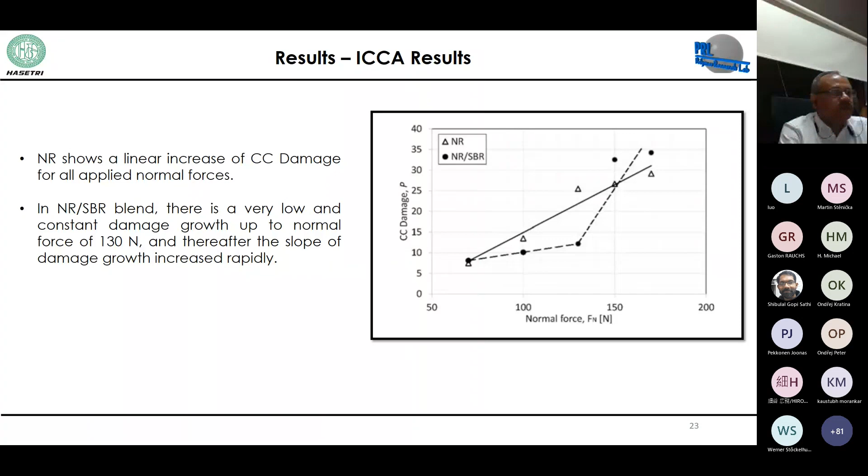So in summary, the complete fatigue crack growth characteristics of rubber from endurance limit up to the ultimate strength is determined for these two compounds.

Non-crystallizing SBR exhibited higher threshold of intrinsic strength compared to the strain crystallizing NR, and FCG rate in the stable crack growth zone is lower in NR compound compared to the NR SBR compound. Ultimate strength of NR compound is higher than that of NR SBR compound.

Chip and cut behavior of NR SBR compound is lower at low force level compared to NR compound, but the trend gets reversed at higher force level. So that is the key while you use it for a practical application.

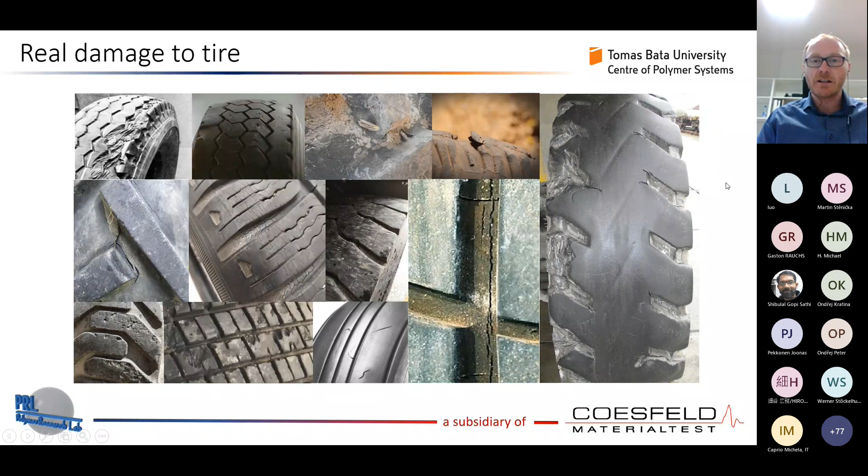Let's go. If we see such real cases of damage on a tire as an example, the industrial request would be to optimize the rubber's resistance against real damage still within the phase of compound development. We need to solve this question: how do we describe and determine the fracture behavior for a product that is loaded cyclically, that's the fatigue crack growth characteristic, which has been presented since the 1960s, from Lake and Lindley.

This diagram is for two materials as an example, an NR material and SBR. Both gentlemen, Chris and Dr. Ghosh, spoke about these two materials as well and presented this characteristic, so you know this very well. I will go more in detail regarding this characteristic. We can divide it into 4 different phases.

Firstly, we have a region, the first phase, where no crack initiation and crack growth occur. Mainly there is some issue with ozone and chemical problems, but there is no crack initiation. Then, at T0, which is the intrinsic strength or endurance limit, the crack is initiated and starts.

We need to understand that crack initiation means that there is a crack in the rubber material, however this crack doesn't propagate. Firstly, when we go over the energy associated with T0, then the crack is initiated and propagates. This we need to fully understand.

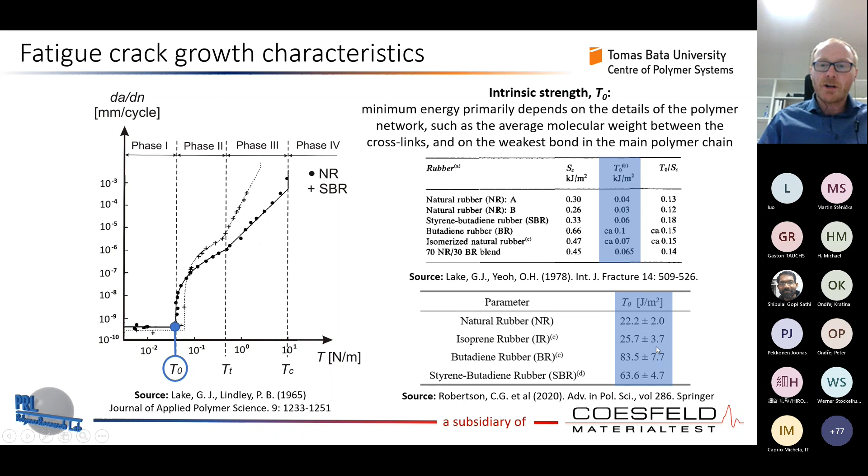So, and the same ranking: the largest is butadiene rubber, the lowest natural rubber, and in between is styrene butadiene rubber. Okay, let's go to the transient point. It is really important to understand each point within this crack growth, fatigue crack growth characteristic. So the transient tearing energy, what is it, this point? Let's say it can be understood as a discontinuity of the fatigue crack growth curve. However, can in some natural problem be a discontinuity? That's a big question.

And let's say I never saw within a pristine rubber such a transient point in all I measured in the past. What we did once is what was presented from a colleague, Dr. Ghosh, and in 2014 we published a paper where we investigated blends.

This was a blend, NR/BR, in proportions: pure NR, and then NR/BR 80-20, 70-30, 60-40. And if we really focus in detail, we will see mostly that NR/BR 100, pure NR, there is really more or less no transient point. However, once the BR content increases and we incorporate it, then the transient point becomes more dominant with increasing BR content.

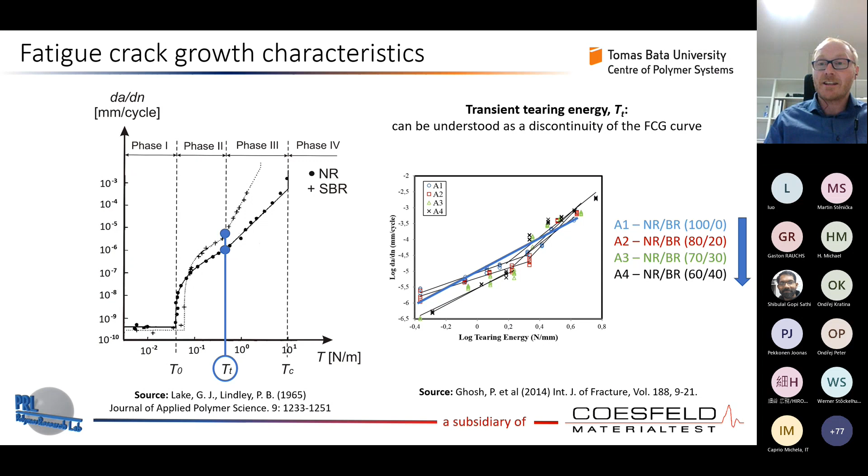So from my opinion, such a transient point can be associated with an effect like fracture mechanics in blends - some interface between the two rubbers. However, in a pristine rubber, there is more or less no transient point. This is important to understand and maybe to investigate.

As you can see, this nicely corresponds with what Chris presented in the first presentation. We have the largest resistance against fatigue crack growth in natural rubber, and the weakest material is butadiene rubber, with styrene butadiene rubber somewhere in between. Very exact correspondence, and as you can see, using a different machine, there is always the same result for these materials, corresponding even with Lake and Lindley.

And then we have the last point, which is TC, and what we measured as well with another method is that natural rubber has the highest TC, then styrene butadiene rubber, corresponding again with Lake and Lindley, and the lowest TC has butadiene rubber, exactly as expected by all of you. So this nicely corresponds, and we can find everything about rubber fracture behavior within this diagram.

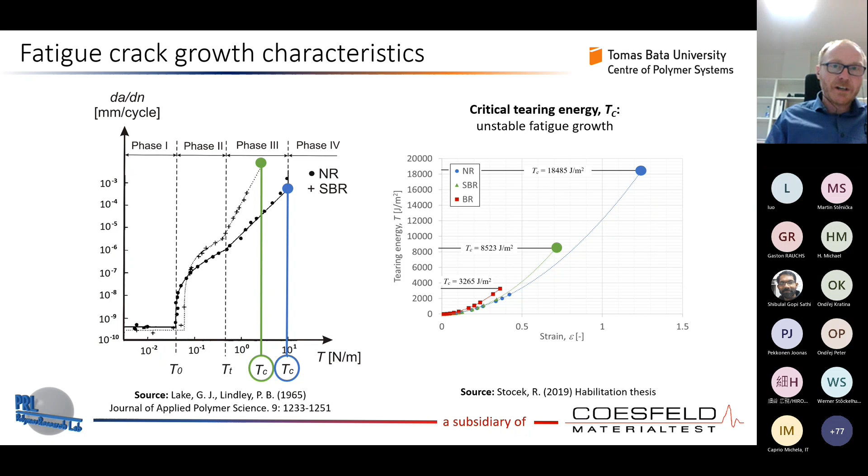So, now fatigue crack growth in practice. This was slightly the theory, proven with laboratory methods. What is it in practice? In practice, we have here an example of a tyre, and here we can find every fracture process we have.

So there is wear, fatigue wear or abrasive wear. We have fatigue crack growth visible here. We have cut and chip here. And this is associated with the fatigue crack growth characteristic we have here. So we will find, for the lower tearing energy region, the wear, firstly fatigue, followed by abrasive wear. Then we have fatigue crack growth, and finally we find cut and chip.

This was nicely presented by Dr. Ghosh in the previous presentation. However, we can really find everything in this diagram. This is a very powerful diagram, and we need to understand it.

If we follow some basic polymers and focus only on polymers like natural rubber and butadiene rubber, we can very clearly see that with increasing butadiene rubber content, in this low tearing energy region, higher resistance against crack initiation and abrasion or wear will be achieved.

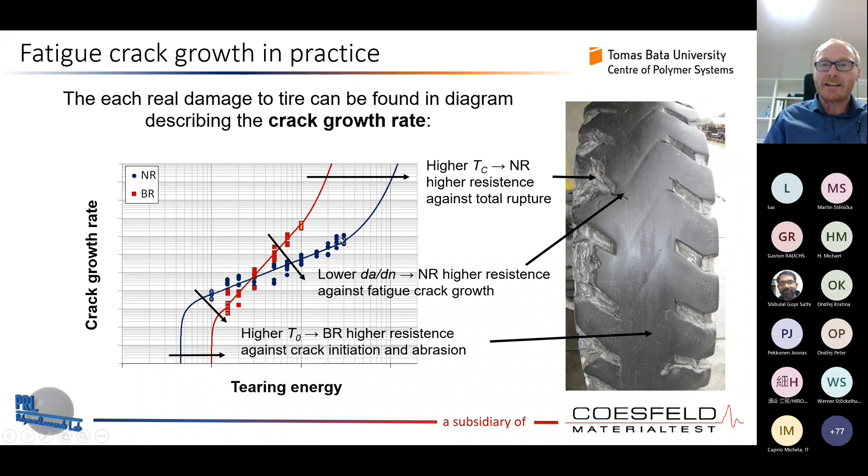That's because very quick crack growth processes occur. Compared to butadiene rubber, once there is crack propagation, it will immediately propagate close to TC, and we will never be able to stop it.

So, importance of fatigue crack growth behavior - we can summarize it like that: the knowledge of fatigue crack growth propagation is too important not to be described accurately.

Accurate numerical predictions require absolutely precise data. Each change in the fatigue crack growth curve represents a change in fracture behavior, whether in fatigue or abrasive wear, fatigue crack growth, or unstable crack propagation.

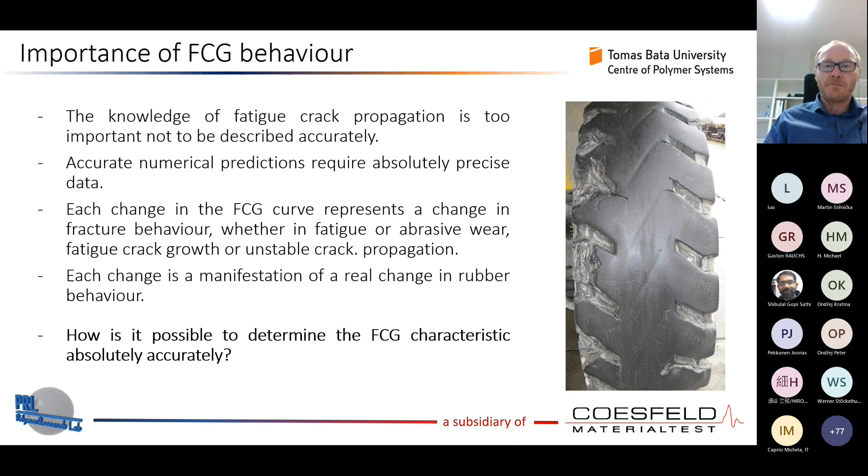So each change is a manifestation of a real change in rubber behavior. Therefore the main question is: how is it possible to determine the fatigue crack growth characteristic absolutely accurately and completely, from T0 up to TC, as accurately as possible? So how to do it? Exact determination of fatigue crack growth.

We have here an example, which Chris presented as well. This is an EPDM with filler fraction 0.24. What we did was perform a very detailed fatigue crack growth analysis with our tear and fatigue analyzer, to get as exact a curve as possible.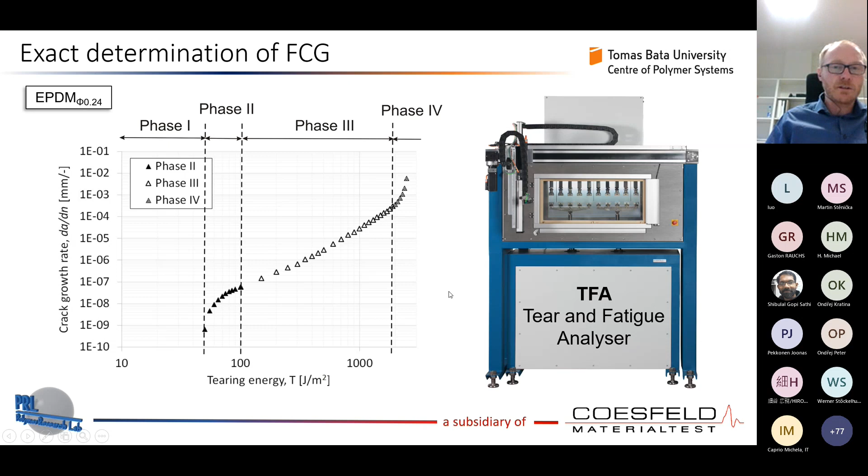All the phases we performed and went over, and now there is a detail of these three phases. Of course we avoid the first phase and start with the second one, starting with T0.

This is the diagram. In the middle we have the stable crack growth, the power law phase, and then the last one is close to TC, up to TC.

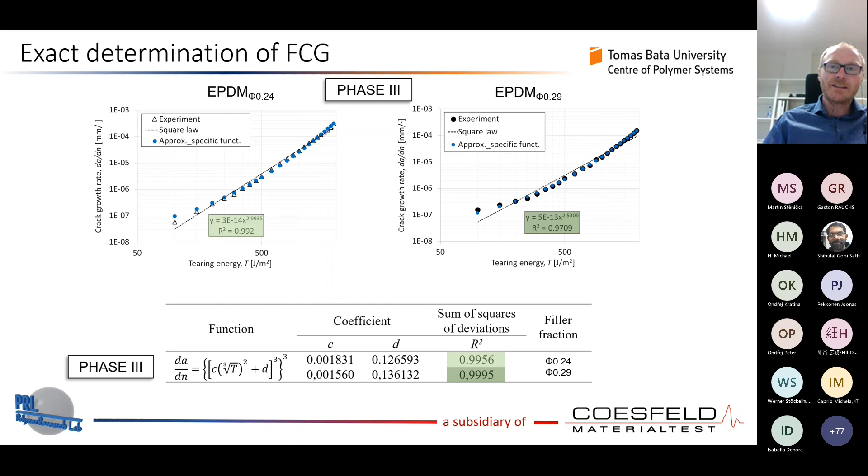So almost identical behavior, and you can see on the shape, it is really important to follow exactly the shape of the behavior. It is not exact power law. If we would like to have exact data, we need to have a specific function.

Now a very important question is the time requirement for the fatigue crack growth determination. You can see here for this EPDM fill fraction 0.24, there is a right-hand side diagram, which is the dependent tearing energy on a cycle number. How many cycles we needed for the measurement of this tearing energy of the crack propagation. There are two data sets.

A and B, whereas A is currently applied time, that means what we really applied, and B is recalculated time to reach the crack growth of 0.01 millimeter, 10 microns, because 10 microns would be enough for the optical system of the tear and fatigue analyzer to detect there is a stable crack growth.

So what you can see is that, let's say, only for the B parameter, for the B measurement, we need for the evaluation of phase 2 close to T0, we need approximately 3,000 hours of measurement. Whereas for the stable crack growth, phase 3, we need only 19 hours.

And for phase 4, close to the ultimate strength, critical tearing energy, we need 0.005 hours to have it. So that's very important information, because this is really too slow. You need a lot of time to make such an investigation.

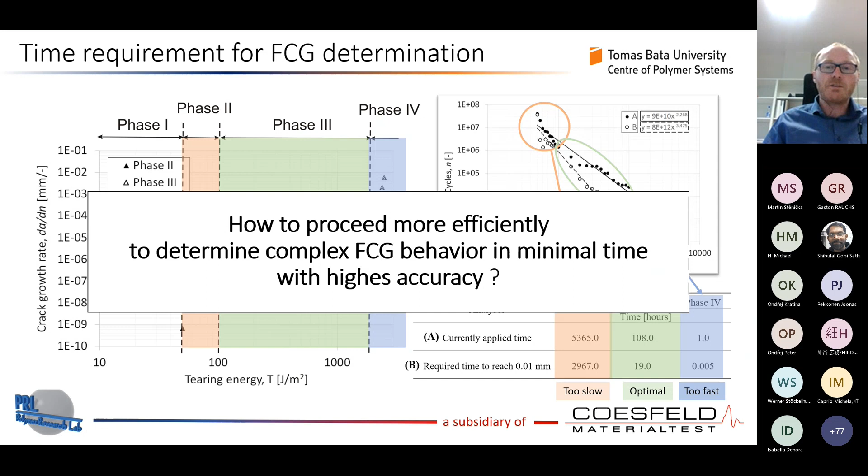And in phase 3, we know that we need, let's say, to measure it as it is, however, we need to more precisely define the specific function compared to power law. So how to proceed more efficiently to determine complex fatigue crack growth behavior in minimal time with highest accuracy?

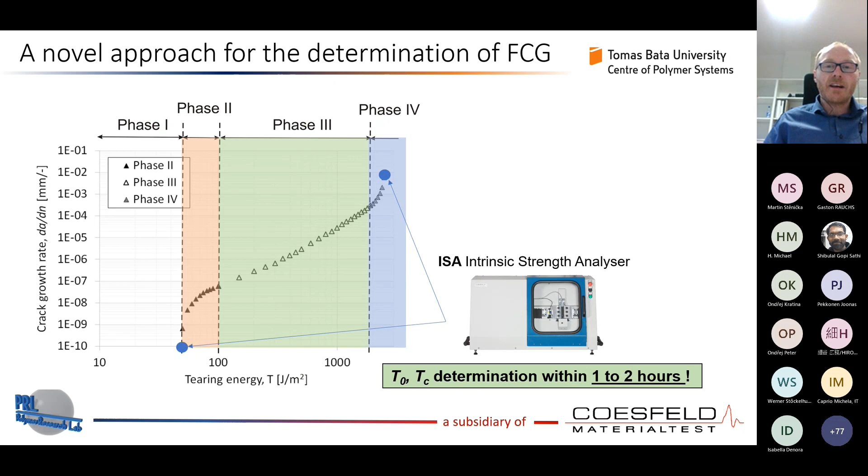Let's say there is a possibility, as Chris introduced. These 2 points, T0 and TC, can be very quickly, within 1 to 2 hours, determined with that intrinsic strength analyzer. So we would have these 2 points.

This middle part, there is, let's say, a very good time to analyze it, and very efficiently and accurately to analyze with tear and fatigue analyzer. That's very common, and that is the best choice to do it. So this is a stable crack growth determination within few hours. So generally, within few hours, we can have T0, TC, and a stable crack growth.

And of course, the question is how we could get these parts to have an exact, complete fatigue crack growth curve. This is what we would need to have.

So a novel approach for the determination of fatigue crack growth is, let's say, finding a general function defining the fatigue crack growth rate in dependence on tearing energy, one function which would describe this complete behavior. How to do it? Let's say we have that function already.

However, I will not introduce it because this is not part of the book, and I will introduce it later in the future. So we have here, yeah, two. Yeah, I will do it like that.

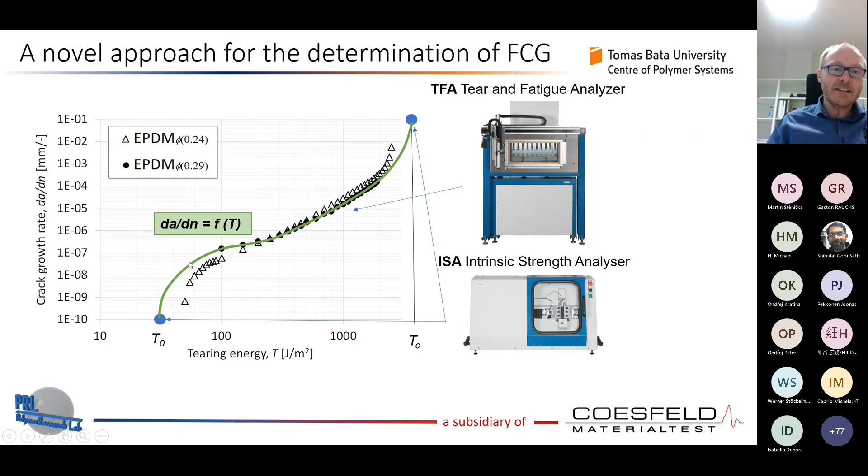The complex fatigue crack growth behavior can exactly be determined in a minimal time requirement using these 2 equipments, and we can have a very exact, complete fatigue crack growth curve. So let's say ISA and TFA are a very powerful set of equipment for highly efficient determination of exact fatigue crack growth data, as we see, in connection as well with the one function for the description of a complete fatigue crack growth.

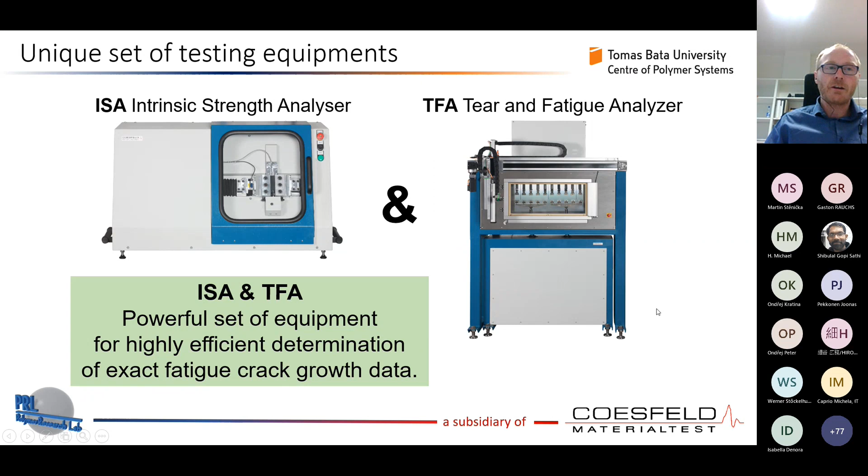One more point is how to use the right specimen geometry to understand that we have the right data. I'll go quickly through this part. In general, we are using a plane strain, so-called pure shear sample. This is very important, the pure shear. I suppose everybody knows what that means.

It only means that we don't have any deformation orthogonally to the main strain, in the direction of the width of the sample. There is no deformation - this is what pure shear means. However, I am not calling that pure shear, I am calling it plane strain, and you will see why.

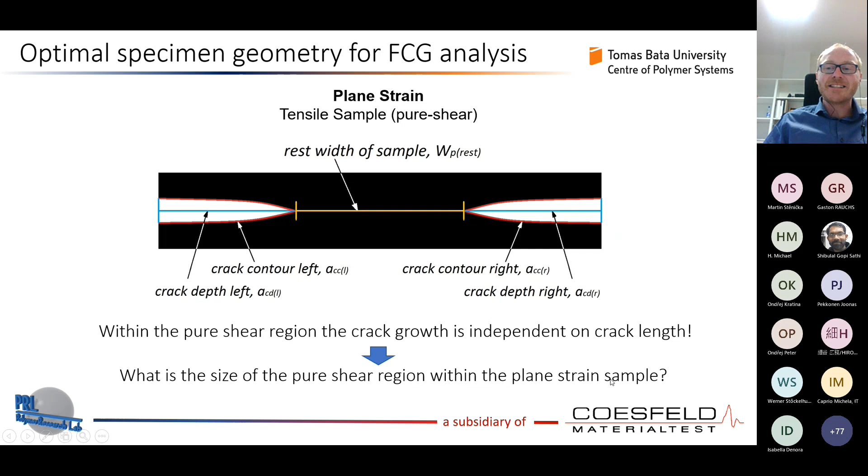So the plane strain is an optimal sample for crack growth characteristic measurement, because within the pure shear region, the crack growth is independent of the crack length. That means we need to ask: what is the size of the pure shear region within the plane strain sample? And is there any pure shear region at all? These are the main questions.

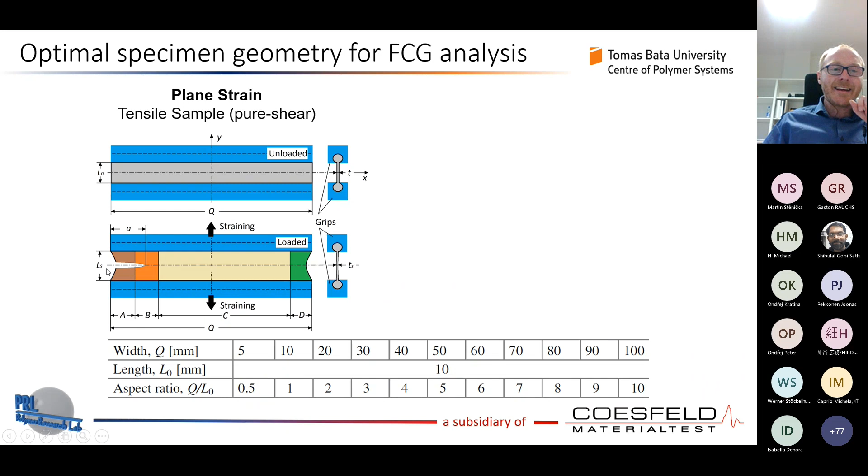In a paper we presented with a colleague in the book, we investigated this phenomenon for different aspect ratios - the ratio of width to length or height of the sample, from 0.5 up to 10. We used digital image correlation to describe the deformation fields or strain fields in the x direction, the direction of the width.

So the first step is strain influence - is there a strain influence on the deformation in this direction? If you see such a diagram for different strains, you might say, yeah, maybe there is an influence. However, then I will show you something - I will normalize this diagram. And what I get for all strains from 0.05 up to 0.5, 50%, there is no difference.

On the x-axis, the abscissa, and on the y-axis is a constant contraction. If we have a contraction from this point up to this point, how big is the contraction - that's the deformation. And you can see from that zero point, the SC, there is always a deformation in this direction.

Of course, the largest deformation is at SE here - that's expectable. However, what is not expectable is that there is always a deformation over the complete width of the sample, independent of the strain. Even if you apply a very low strain, immediately you have deformation there.

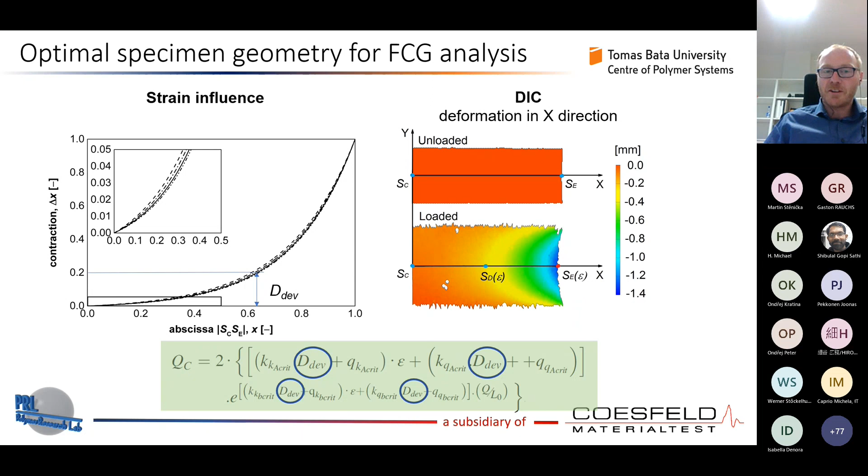For example, as I denoted here, if we allow 20% deviation, then we will have here the 20%, and we can calculate how big the pure shear region will be at this point, and so on. That's a very important point.

The optimal specimen geometry for fatigue crack growth analysis is the plane strain sample, for sure. But with the knowledge that there is no pure shear state in the sample, you can only measure this with the knowledge of how big your deviation is from this pure shear state. That's a very important point.

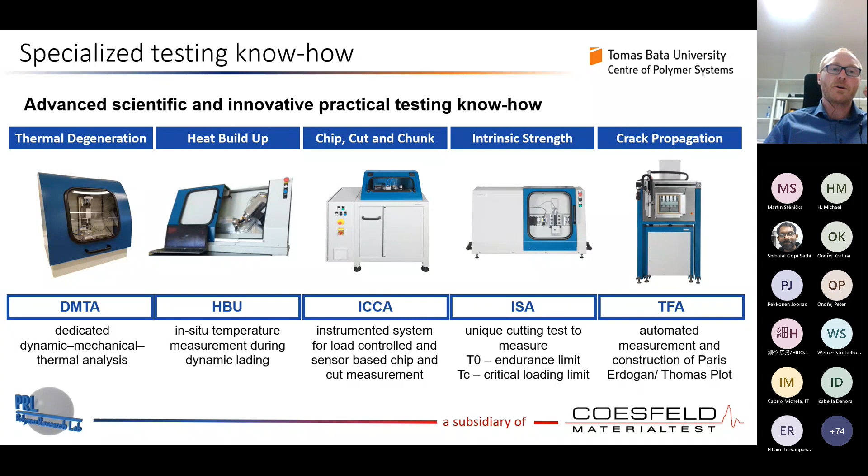Okay, I'm at the end of my presentation, and I would only like to show you special testing know-how which we have developed over the last years. What I hope to speak about, along with my colleagues, in future webinars includes the heat build-up analyzer, which measures heat build-up in situ under cyclic loading conditions inside the rubber sample - that's very important. Another fresh testing method and equipment is the DMTA, dedicated dynamic mechanical thermal analyzer, which we use for accelerated measurement of aging behavior of material related to fracture mechanics.